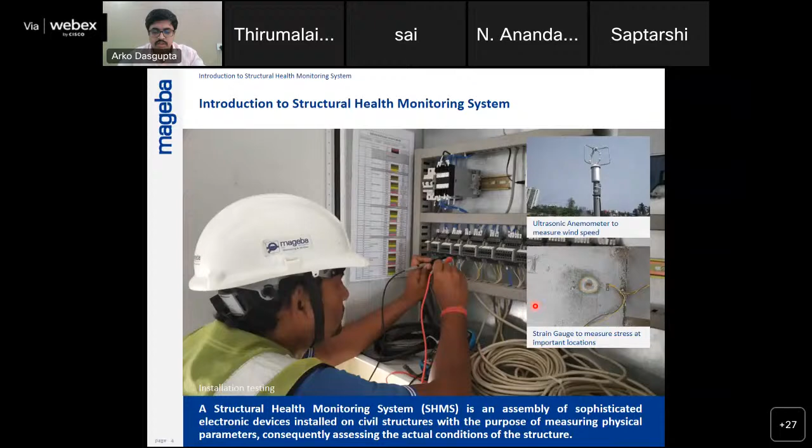What are its benefits over manual monitoring? It has a very high level of efficiency. Loss due to human errors is avoided. We can measure higher details like vibration. The system can work 24/7 without any hindrance. All reports are quickly available over the web. Most importantly, alarm notification: in case an alarm is generated by the system at any time, it is always available over the web without any human intervention.

The different phases where SHM is used: number one is initial construction, inspection and maintenance to investigate a particular concern, and also during renovation purposes.

With this video, you can already see that bridges and all structures are non-static objects that are designed to resist forces, movements, vibration, inclination, temperature, etc. So our goal is to measure all these parameters and see how well their resistance is against such movements.

Some examples where SHM could have prevented failures. It's a very morbid slide, so I won't go into much detail about each case, but the takeaway is that from 1950 to 1999, there have been globally more than 2,200 people dead and more than 1,500 injured. From 2000 to 2019, more than 950 people have lost their lives and more than 850 injured. The numbers in India also are not looking very nice.

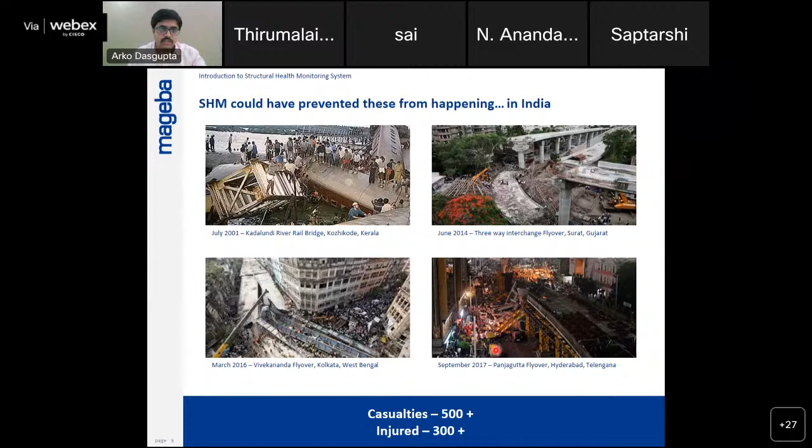Coming to the overview. Sorry, somehow...

The basic overview for any structural health monitoring remains the same. We have the structure, and from the structure we define the scope of what is to be monitored. Depending on the scope, the sensors are defined. Depending on the sensors and their output types, the data acquisition is finalized. Then the software is decided, which takes the data, filters it, and gives you only what is relevant, with output sent to the user for verification.

The typical bridge SHM: we have the structure, sensors installed, and A to D converters, which are required if the sensor is analog, placed as close as possible to the sensors to reduce loss due to extra cabling. All this digital data is transferred to a bridge computer, which wirelessly or via cables transfers it to our server.

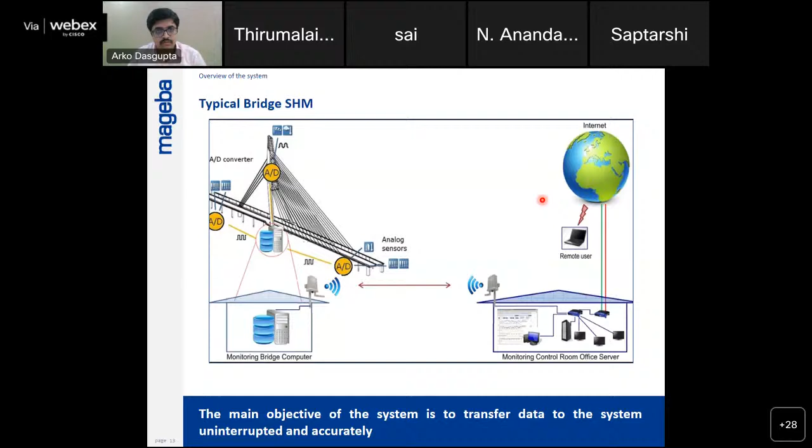Now the question is, what can we measure? We can measure vibration, steel temperature, strain, absolute GPS movement, galvanic corrosion, but these are only a few examples. Due to the development of sensor technologies, any and every parameter as on date can be measured either directly by a single sensor or by a combination of sensors.

The previous slide talked about the structural response, and similarly, we measure the reason for the structural response. We monitor the environmental parameters as well as the traffic movements and loads, so we understand how the structure behaves due to environmental or traffic loads. We have to monitor these also to know the cause of the reaction.

The RoboControl master station, as we call it, should be a lockable box with minimum IP67 protection rating because these are kept out in the weathering elements. Everything should be compactly arranged. The data should be redundantly stored in 2 or 3 different areas. The entire thing should be a PC-based system, so we do not have to bring it back - if something goes wrong, we can take our laptop and solve it on spot. Everything should be of modular design, so if one module is non-functional, the other module should function on its own. It should have a mini power backup in case of power failure.

So we move on to data acquisition analysis. What do we try to analyze? We try to collect data with a frequency of around 10,000 hertz. Then we have modular power supply - since all these sensors work on different power supply, modular power supply needs to be provided on site.

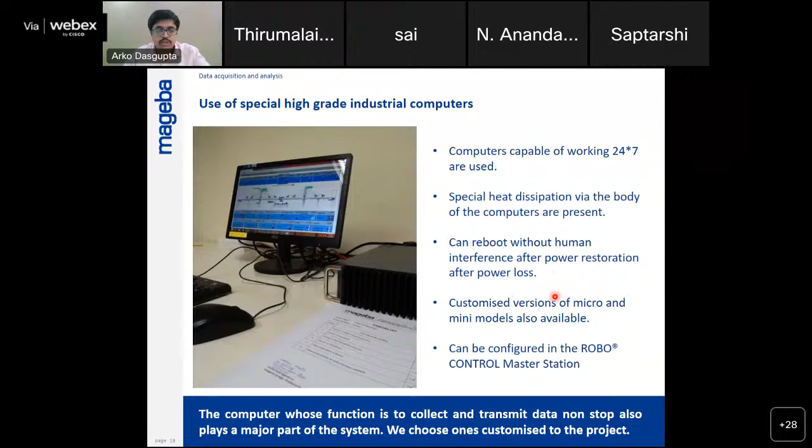At site, we use industrial computers which can reboot without any human interference, after power restoration after a power loss. All these should be available in mini and micro models and are configured inside the RoboControl master station.

Web user interface - all this data should be available on the web. We have a dashboard where you can see the system overview, current and last values, alarm values, minimum maximum values, comparison of different graphs, and individual graphs can also be connected there. We can see historical graphs, say from 2009 to 2014, the entire movement of one particular structure has been recorded, so we understand how the structure is behaving over a longer period of time.

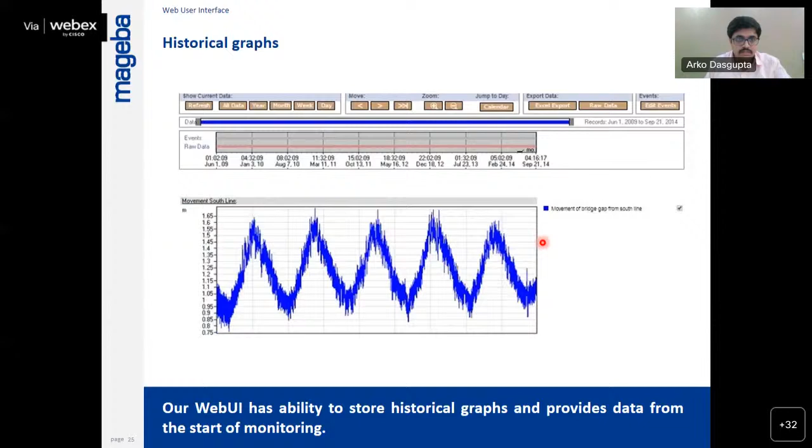Then we'll go to some case studies - some of the projects completed in India. Number one is Signature Bridge at Wazirabad, which is equipped with 104 sensors for permanent monitoring.

As you were speaking about concrete corrosion, galvanic corrosion, we have concrete galvanic corrosion sensors installed inside the piers during concrete casting. We have structural accelerometers over there to monitor the vibration.

Metro Bridge in Mumbai, Maharashtra, is equipped with more than 25 sensors to monitor train movements and the effect of the same on the bridge. It's a three-tier architectural scheme with the metro bridge on top, the Western Express Highway below that, and the road below that, so we have multiple types of sensors over there also.

Hanging bridge in Kota, Rajasthan - it was monitored during the construction phase also, to track the movement of the pylon when the cables were being stretched, and finally a permanent system is installed over there.

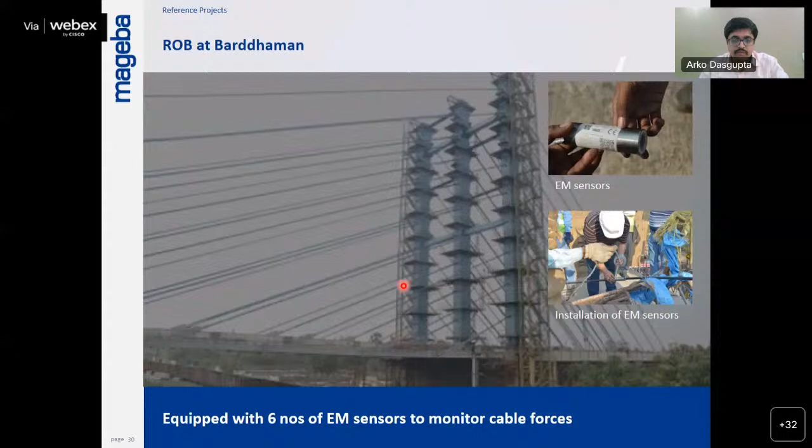ROB at Barddhaman, where we have electromagnetic force sensors installed inside the cables, which are monitoring the force of the cables directly. And we come to the final case study for today, Majerhat Bridge in Kolkata, which is equipped with more than 50 sensors right now to monitor itself.

So let's go to the brief history of Majerhat Bridge. Majerhat Bridge was operational from 1962. In 2018, it collapsed because it was a simply supported span and an intercity railway line was passing below the same. The route which connected Majerhat to part of Kolkata is a very important trade route for certain districts in the area. The old bridge had to be replaced by a completely new bridge, a cable-stayed bridge with a main span of 100 meters and total length of 565 meters, and it's equipped with a complete monitoring system.

Now, positioning of the sensors across the structure: we have stay accelerometers on the cables, accelerometers in the deck, strain gauges at important locations, inclinometers to monitor the inclination of the pylons, displacement sensors to monitor the movement of the expansion joint, a laser sensor at the center to monitor the vertical deflection of the structure, and then the environmental sensors: wind speed and direction, structural temperature, air temperature, and humidity.

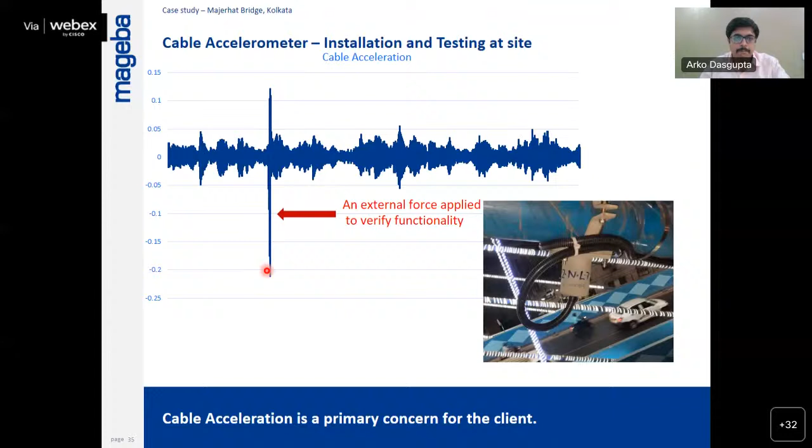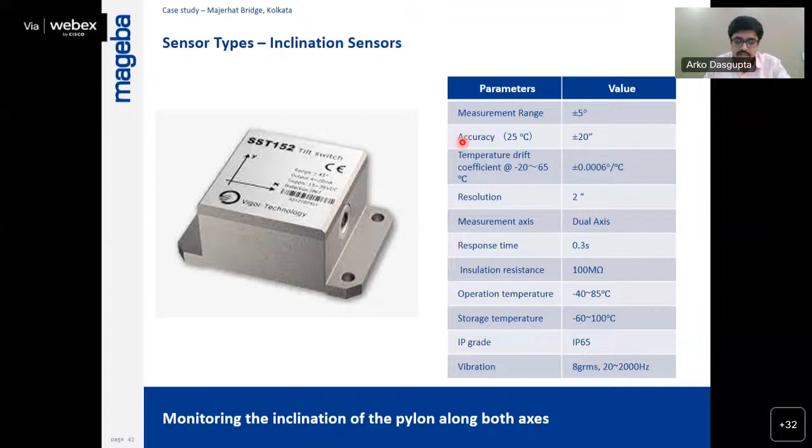Inclination sensors are installed at the pylon to monitor the inclination of the pylons in X and Y directions. Then we have displacement sensors monitoring the movement of the expansion joints. Laser sensors are installed just below the center of the deck, monitoring the vertical deflection of the structure. Ultrasonic anemometer monitoring the wind speed and directions. We have structural temperature sensors monitoring the structure's temperature throughout the time. Air temperature and humidity monitor for correlation purposes.

And also the bearings of the main bridge are being monitored with the draw wire displacement sensor to see how much they are moving over a period of time. Now, some examples of what has been done. The one on the top is structural temperature data from 29th August to 4th September. The one below is the strain gauge data from 29th August to 4th September. We see that both graphs follow each other. So we can say the strain developed on the structure is synonymous to the temperature, and overall the bridge is following environmental load.

Now the question is, the graph for strain, which is very smooth at the top, becomes very rough at the bottom. The bottom has deformations. At first we analyzed the data and took a lot of time to see if there was some problem with our data acquisition system, and then we realized that these minor spikes, or the abruptness in this data, are only generated because heavy loaded trucks are allowed to pass through the bridge only at night. So in conclusion, further analysis is always done by the designer, but from our perspective, this is the effect of environmental load on the structure, and these minor peaks are the effect of live load on the structure.

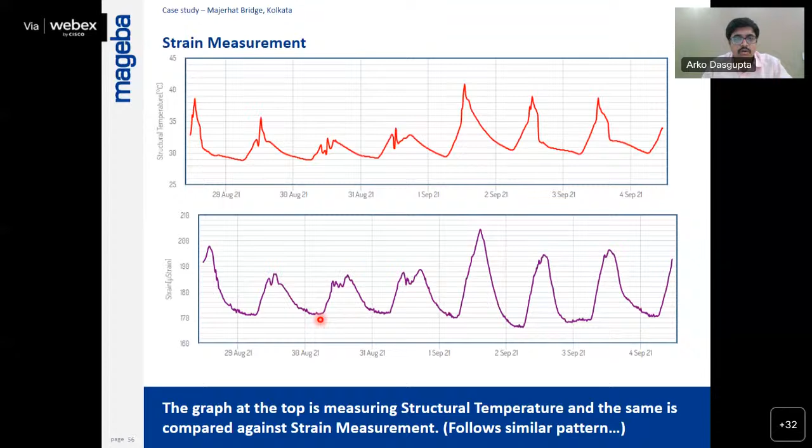So with this type of data, which is generated over a period of time, we can monitor the behavior of the structure with respect to certain environmental conditions or certain excess load conditions over time also. So the objective is to do such analysis. We need to generate the particular time-correct data, which is our main scope.

So coming to the conclusion, why do we need structural health monitoring? It helps you for safety assessment, for damage assessment. It's a quality control approved method. It's an economic method. You can do risk assessment. Alarms can be notified anytime. Design verification can be done as to whether the structure is behaving or not. Customized solutions are always there because every structure is different, and expert advice is always available. Thank you very much.

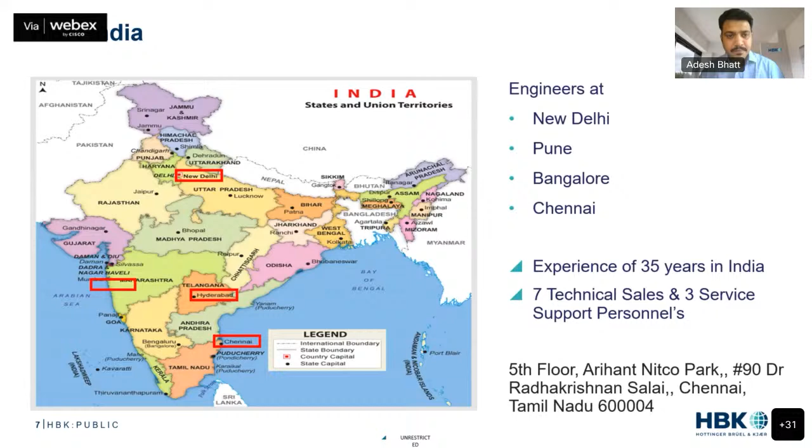So basically, we have solutions across the whole physics portfolio. We have solutions in mechanical for strain, load, torque, force, durability measurement. When I say solutions, that means we are the manufacturer of those solutions. We have solutions for noise, sound quality, sound power, and acoustic measurement. And electrical also, people use our solutions for electric vehicle testing, so there we have solutions for electrical voltage, electrical current, temperature, all those parameters.

Now coming to the point of structural health monitoring. As explained previously by some of the presenters, what is structural health monitoring? It's a process of implementing instrumentation, then analyzing the response of your structure. See, structural health monitoring remains common. Your application could be, just a minute.

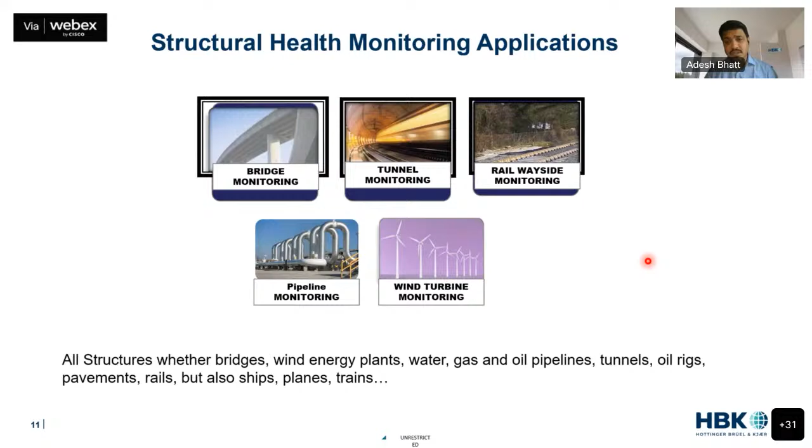Your application could be, your structure can differ. It could be bridge, it could be tunnel, it could be rail wayside, it could be pipeline, it could be wind turbine, or it could be any structure. Structures keep on differing, but the instrumentation for it almost remains the same. Near about, I would say 90-95% of instrumentation remains same, whichever type of structure you talk about.

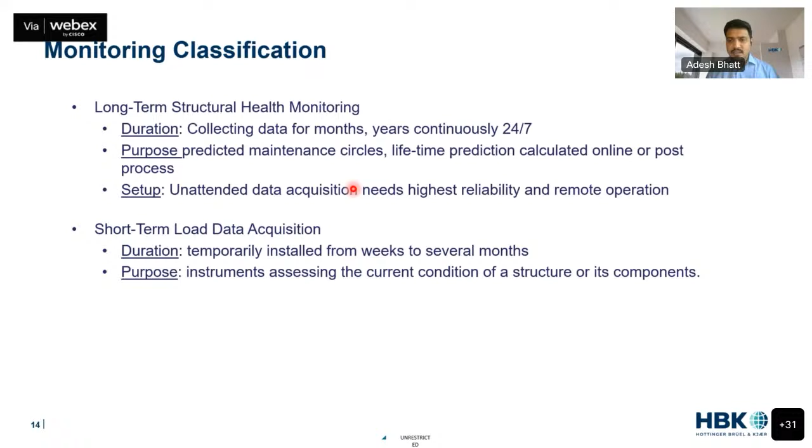There are two types of structural health monitoring, long-term as well as short-term. Long-term is where you mount instrumentation on a structure for a tenure of around 1 year, 2 years, 5 years, 10 years of time. And in short-term monitoring, you have a portable system which you take to different sites. You mount your instrumentation for 1 week or 2 weeks, you capture the data, and you come back and analyze. Our system goes well in both applications.

One more thing, if you're not doing an inspection at regular intervals, then whenever you are doing an inspection, you need a higher level of inspection. You need to go in detail because you don't know what happened in these gaps. So every time you visit, you need a higher level of detailing of inspection. But when you're doing continuous monitoring, because you know what happened in this duration, the level of inspection required, the time of inspection, and the money required for it is lesser.

Now, out of this whole portfolio, except the environmental sensor and server, which are very readily available in India and you can buy in a very cost-effective way, rest everything is manufactured by HBK. So whatever portfolio system integrators or distributors generally have, HBK, being a manufacturer, has it for structural health monitoring. So we stand out to be a single-stop shop for your structural health monitoring needs.

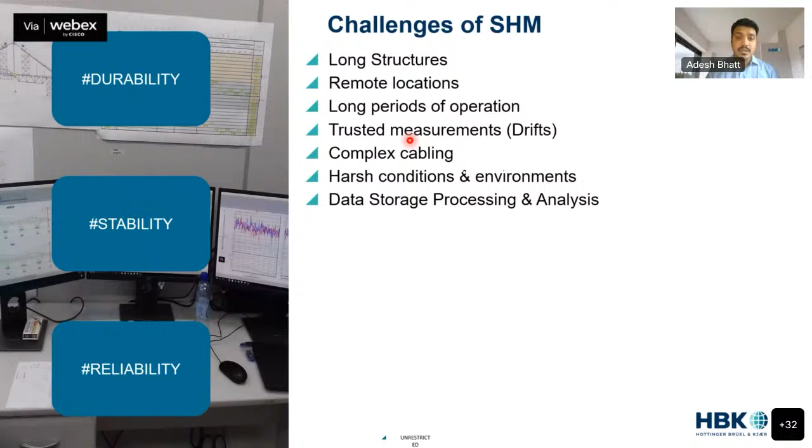Complex cabling. When we talk about bridges, they demand like 70 to 100, 150 sensors. Just imagine 150 sensors, every sensor having 3 to 4 wires. It becomes a very complex cabling. Harsh condition and environment, it is open to wind, air, water, rust, everything. Data storage and processing. So these are the major challenges of structural health monitoring.

And as per us, these are the sensors required for structural health monitoring, which are manufactured by HBK across our factories in Denmark, Germany, Portugal. So load cells, displacement sensor, ICP type vibration sensor, data acquisition system, and strain gauges. We manufacture over 6,000 different types of strain gauges, near about 12 to 15 different types of data acquisition system, and near about 35 different types of load cells.

This is the electrical portfolio. The next one is optical. In optical, we manufacture FBG strain, FBG temperature, FBG accelerometer, FBG tilt sensor, displacement sensor, and optical interrogator, where you can connect optical sensors.

A short slide on how optical sensors work. This is the same optical cable which has been used for years in our telephone and broadband connections at home. We know that same cable comes from tens of kilometers, hundreds of kilometers, so distance is definitely not a challenge. What we do is take the same cable and make a small Bragg grating in it through the laser method. Once this grating is done, this particular phase becomes like a sensor.

This particular small Bragg grating is supposed to reflect a particular wavelength. Every sensor will reflect a particular wavelength. It reflects that particular wavelength and transmits the rest of the wavelengths further. So you can connect two, or 15, 16 different sensors in series. In my system, you can connect 16 different sensors in series with a single cable.

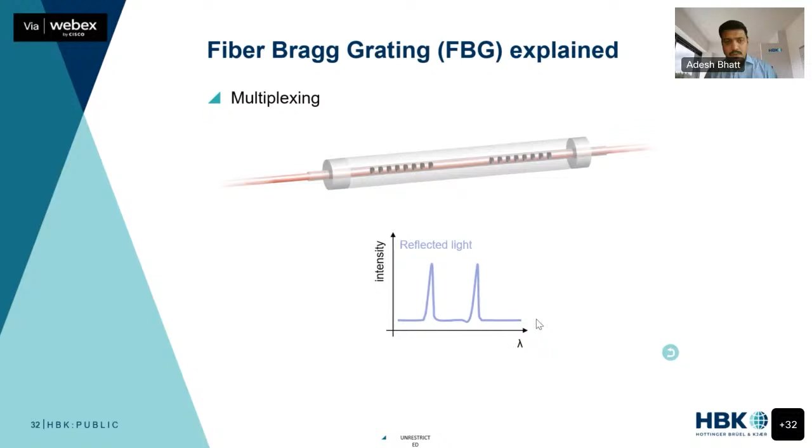What are the advantages of FBG sensors? They have stability. They have an absolute zero reference, because before every triggering, whenever any sweeping happens, a laser is sent which checks whether the measurement channels or sensors are responding to their wavelengths or not. They are insensitive to losses because they work on wavelength, which is unaffected by physical parameters like wind, speed, temperature. Because each works on one particular wavelength, it has its own unique identification. Every sensor has this unique wavelength.

Multiplexing and multifunctioning: you can connect multiple sensors of the same type in series, like multiple temperature or vibration sensors. You can also connect multiple different types of sensors, temperature, tilt, displacement, in series. It has a built-in zero reference. So that's what I said, it doesn't require any calibration because before every laser sweep, one particular wavelength is sent, which checks whether the sensor is responding to that particular wavelength or not.

Nowadays, when we do structural health monitoring, mostly on railway structures, most of our railway structures have a high voltage line above them. It is a fact that near that high voltage line, if you're using any electrical sensor, it will show you attenuated data, because electrical sensors working on DC voltage excitation get attenuated whenever there is a high electromagnetic field near them.

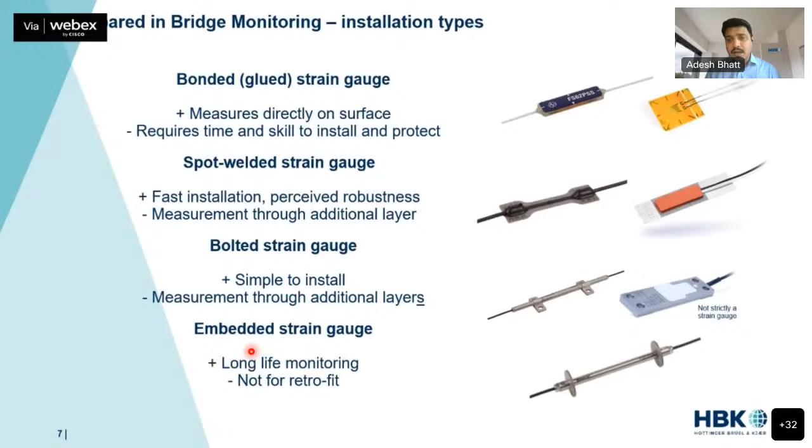We manufacture both types of strain gauges, either embedded, which you can put in while your construction is happening, or we can have surface mounted sensors also. We also manufacture an array of FBG sensors. Like you tell me that you want this much gap between two sensors, then the next sensor this much gap. So we can make those customized solutions also for you. Now, the challenges we talked about, long structures, remote location, long period of operation, these all can be overcome by using a fiber optic solution.

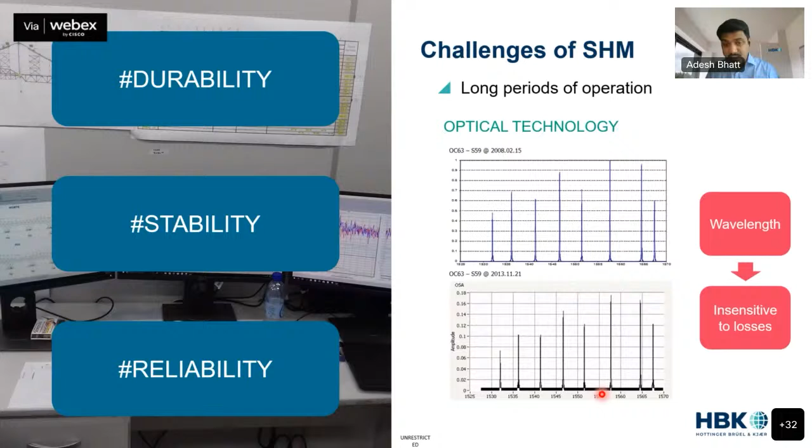Sir, I think you can wrap the presentation maybe in another 2 minutes. Okay, sure. I'll be doing it.

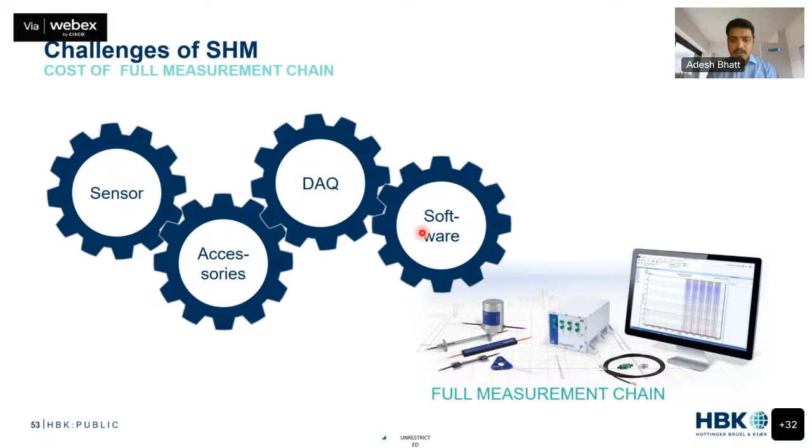And one more thing, in short, I would like to explain hybrid. If I talk about an ideal situation, no application is ever going to be only electrical or only optical. You need a system which should connect optical sensors because that is the demand of the future, and should be able to connect your electrical sensors also because that is what we have had for years. So you should have a data acquisition system which can connect both sensors in parallel. It should not be that someone tells you to connect optical to one data logger, electrical to a different data logger, and start them together.

Because if a situation like an earthquake comes, in milliseconds your whole structure is gone. So clicking two different things is not going to work. So at HBK, because we are the manufacturer of both portfolios, both signals can be logged together in the same data acquisition software that we call Catman, and you can record your parallel data. These are our data acquisition systems. Possibly later we can discuss them.

When we talk about accuracy, we have a 24-bit resolution system. We can log data up to 40,000 samples per second per channel. Every channel can connect all these types of sensors. You don't need a separate data logger for different types of sensors.

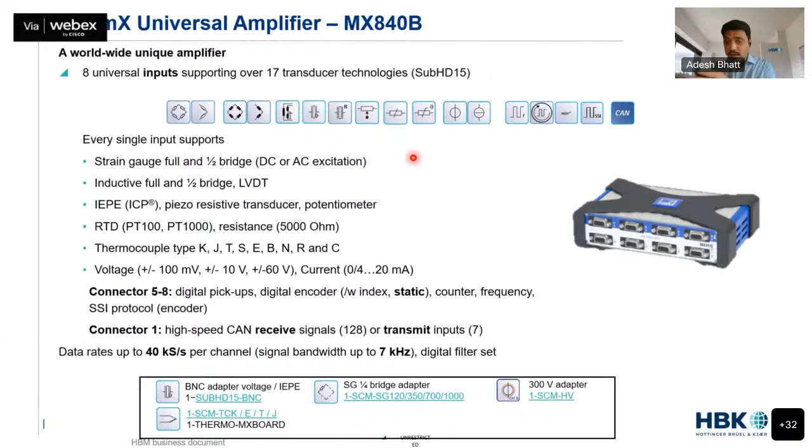I won't be showing the demonstration now. Possibly if someone liked something, we can connect later for the demonstration. That's all from my side. Thank you.

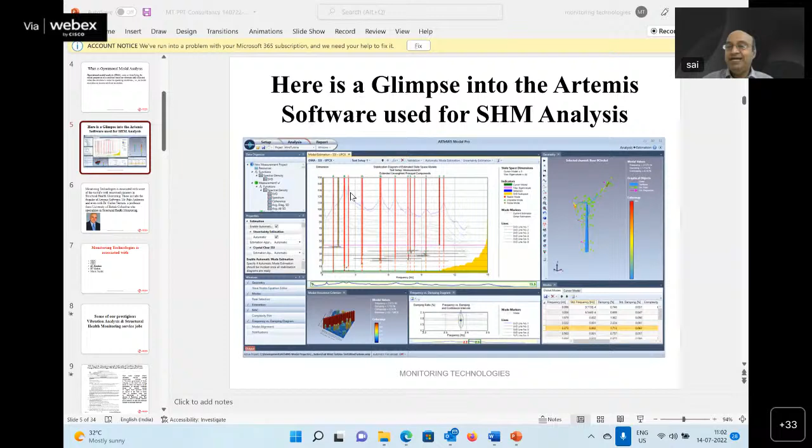So this is the software we are talking about, and it has been widely in use thanks to the heads of departments like Dr. Ramanjanelu, Dr. Saptarshi, who is the active coordinator for this area for this meeting, and Dr. Srinivas Ogu. We are also associated with Dr. A.K. Mathur of IIT Roorkee, and Professor Arun Menon of IIT Chennai, and this is Dr. Carlos Ventura, who is personally associated with us. We have been thinking of bringing him down to India because we did conduct a roadshow in which a lot of officers from various institutions, including SERC, were present, back in February 2020 during my presence at IMAC.

We had certain evenings along with Carlos Ventura and Dr. Palle Andersen, and I requested him, 'Dr. Carlos, you have been going around various places doing structural health monitoring, and I realized you were in China for the Shanghai Tower, the second largest tower in the world.' He mentioned that 5 times in 2019-20 he visited the Shanghai Tower for health monitoring. I requested him to have his presence back in India, and he was kind enough to oblige, but everything went topsy-turvy because of COVID the last 2 years. I was supposed to meet him 15 days ago, but I couldn't. Nevertheless, I'll be meeting him again in the month of February, so hopefully we'll be having him back in India doing some roadshows.

Dr. Carlos Ventura is one of the very regular users of this operational modal analysis software. As I mentioned, some of the other customers who use this - apart from these operational or experimental modal analysis softwares, we are widely associated with vibration analysis of various large machines, I would say, like 210 megawatt turbine analysis, and some of these credentials wherever we are associated.

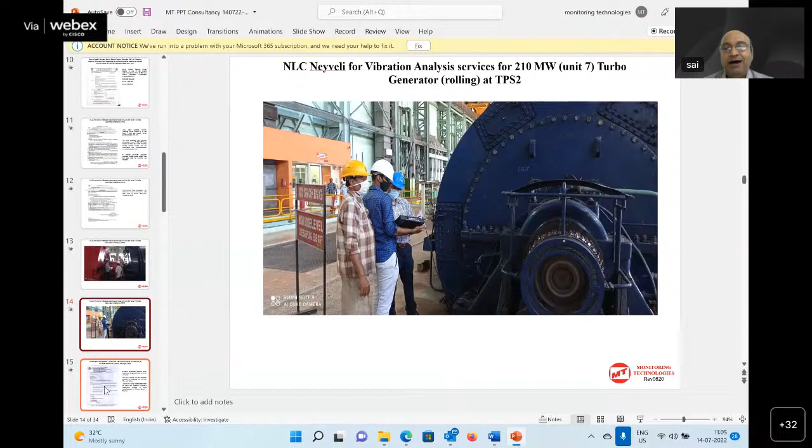This is a 210 megawatt turbine which had very high vibrations, at Neyveli, the Neyveli Lignite Corporation, one of the largest power producers in India. We used all our systems, data acquisition systems and sensors, to take care of the measurements of the entire huge machine. It was resulting in large vibration in the floor, so we carried out diagnostic remedies, including some small balancing, the dynamic balancing of the generator, because turbine balancing is a complicated job, and the generator has the facility to add counter weights. A provision has been given in the generator, and we carried out those jobs at this place.

These are some of the credentials I'd like to quickly share with you. Idukki Hydropower Station, which is one of the largest hydropower stations in India, under Lake Tekadi, which is in the Periyar Sanctuary, an elephant wild sanctuary in Idukki, which is a picnic spot for most people. But not many know that just below Lake Tekadi, vertically something like 800 meters down, there's a tunnel under which there are 6 turbines producing 200 megawatts each, something like 1000 to 1200 megawatts total, which had vibrations of the floor to a level of something like 99 microns or 120 microns.

I'm associated way back - this is one of my oldest cases, way back in 2003. We were able to reduce the vibrations of the turbine by carrying out vibration analysis.

I do have some pictures, but unfortunately I'm not in a situation at this point to share all of that. Perhaps those who are interested will have a second meeting for about an hour. If time and opportunity permit, I would like to get Dr. Palle Andersen as well as Carlos Ventura online for those very much interested in this specialized area of operational modal analysis or experimental modal analysis and structural health monitoring.

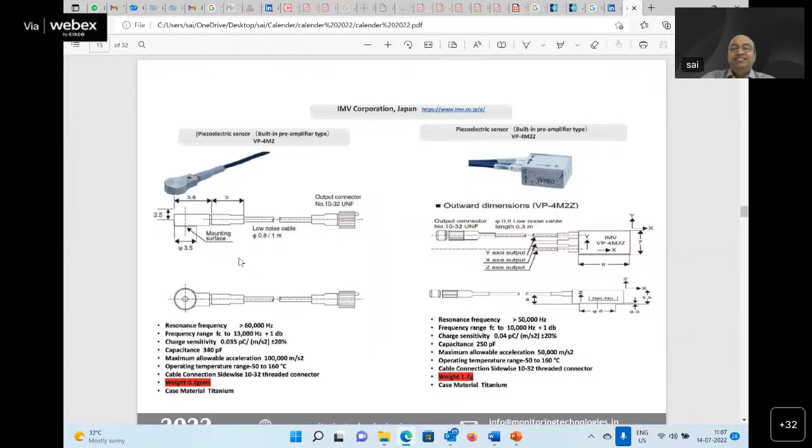I'd like to quickly take you across the various sensors we are dealing with. This is one of the sensors we deal with - IMV Japan, a very specialized sensor of very tiny nature, triaxial sensors. We are a one-stop shop for a complete package of sensors, data acquisition systems, training systems, and portable systems to measure data, acquisition systems, recorders, and very high specialized sensors, packaging them as a total package to supply.

We're also associated with the Vibration Institute and the Mobius Institute, who are pioneers in vibration concepts. There are certain courses like Category 1, Category 2, Category 3, Category 4 in the specialized vibration certification programs which we are associated with.

These are some of the consultancy jobs which we have carried out. As I mentioned, we are associated with most of the Indian industries. DRDO is one of the companies we regularly deal with, BARC. Indian Navy uses our systems, some of the frigates. I'm actually very proud to be associated with some cases I wouldn't like to even talk about - it's prohibited to talk outside - but we are very closely associated with BARC, Indian Navy, DRDO group of companies, supplying systems to various advanced protection systems for India, contributing quite a lot of systems and supporting software.

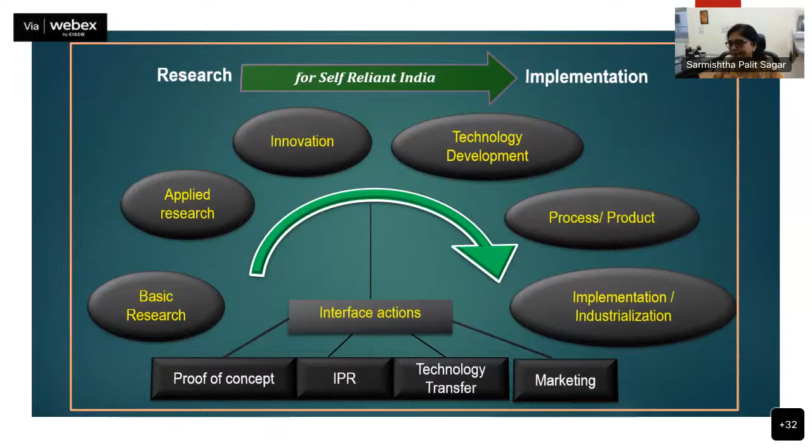One of the major problems of this billet caster is the breakout. What is breakout? Breakout is when the liquid steel spills from inside the billet and breaks out of the skin. It causes sticking of this liquid steel, that is, it solidifies inside the equipment. So not only the loss of production, it also causes time cleaning the equipment, a lot of time, and sometimes equipment failure. So it's really a major problem.

Generally this problem exists in continuous casters. But for the slab caster, where plate-type material comes out, the mold is a plate mold with thickness nearly 40 to 50 mm. It is very easy in that case because the design is so generous, it allows you to place thermocouples in the channels. Also, the water flows through slots behind the plates. So every slab caster mold comes as an instrumented mold, and the breakout prediction logic already exists.

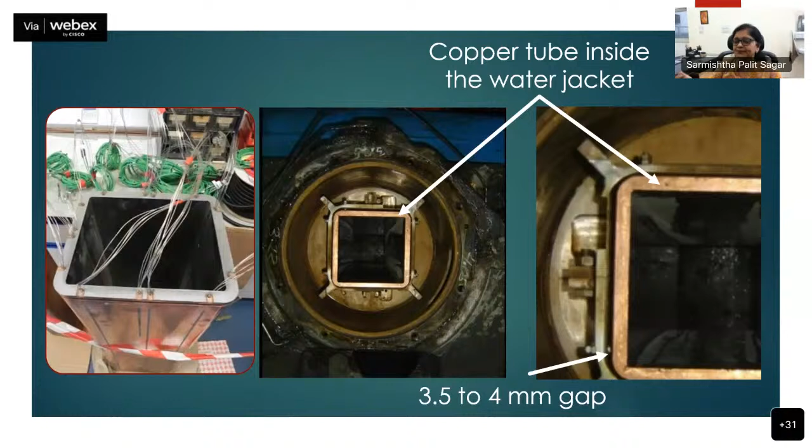But unfortunately, thermocouples are not a viable solution for the billet mold. You can see the picture on my left side. If we consider thermocouples, even for an R&D study, so many cables may come out, like a patient with lots of tubes on his body. And you can see how the copper mold looks inside the mold assembly. There is a water jacket surrounding it.

And the gap is only 3.5 to 4 millimeter. So you have to protect from the leaking of water, because there is 1800-degree liquid steel passing. That means if any liquid comes, if there is any puncture, it will be like sitting on a bomb. So all these problems have not allowed having an instrumented billet mold, where you can target this problem of breakout.

Now the question is, if it is so important, why has it not been done yet? Yes, for the slab mold, why is it so important? Because the loss is quite huge. It is nearly 10 hours of stoppage of production, whereas in case of billet mold, it is 4 hours of stoppage of production. So people have gone with a theoretical model. They have not come to the practical one, as there were lots of issues.

We came up, along with CGCRI Kolkata, with a solution using fiber Bragg gratings. As Adesh has already talked about the advantages of FBGs, I'm not coming into that. I only want to say the one advantage I'm taking: the number of sensors you can write in a single fiber, and that can be placed. And because its dimension is very narrow, 120 micron, without damaging the surface of the mold, you can make only a 1 or 2 millimeter groove and do a proper engineering design to embed the fiber on the cold wall of one face of the mold, or on 4 faces.

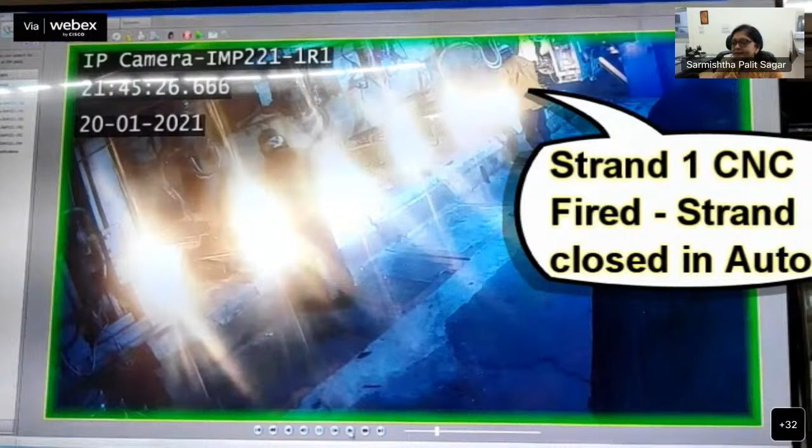So this is the work on breakout detection using fiber Bragg grating sensors, for an area which is difficult to access. And actually this is the first time in the world that a breakout was detected in a billet caster in advance and corrective measures were taken. This was from the customer desk, where he has written that it holds tremendous potential to save cost and improve the productivity of a billet casting plant.

Coming to our other 2 sensor works, because NML is one of the NDE centers in India. The other center is in IIT Chennai, and our NDE activities are quite elaborate. From NDE, we have come to structural health monitoring, and we developed a lot of methodologies for progressive damage assessment before the material fails, along with quality assessment of the product. As my topic mentions, it is for process and product improvement. The first was on process improvement. Breakout can be detected much before, and you can take proper action to prevent it, so the process can be monitored.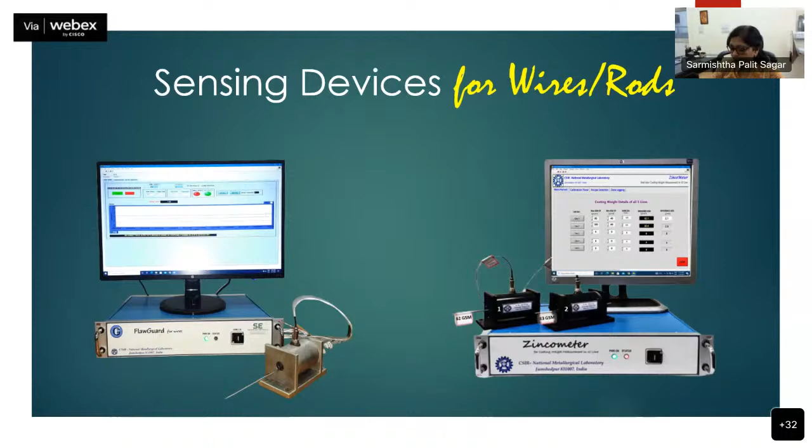Coming to the second part of my lecture, which is basically on product quality assessment. One device we will talk about, we named it Flaw Guard. That means it is guarding against flaws in the product. And another is the zincometer, which is used for zinc coating weight measurement on thin wire during its processing. All are real time. In wire drawing industries, this wire is drawn at very high speed, nearly 8 to 12 meters per second.

And when this wire is being used for very high-end applications, that is, if it is used for tire bead wire, which is used in vehicle tires, that is in trucks and buses, and if there is any failure, suppose, because spotting very small defects like transverse crack, sliver, fins, which normally happen in wire, detecting at that speed by the naked eye is impossible. It is not at all. That means you need some real-time prediction system.

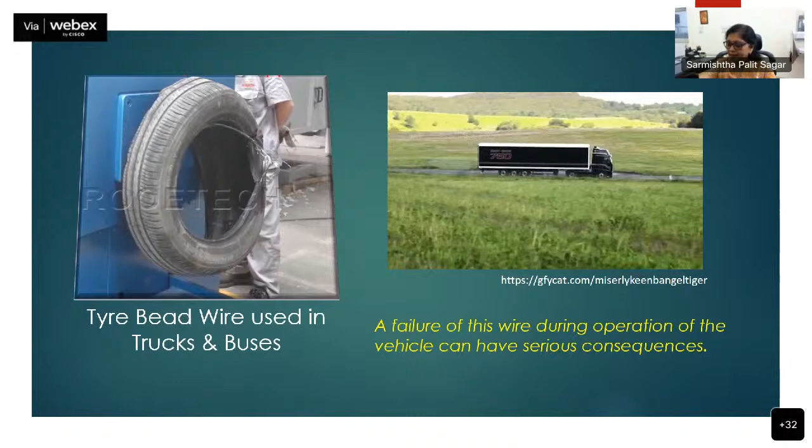Some systems are available globally, which are for thick wire, and the speed is much lower, 4 to 5 meters per second. But for these high-end application wires, wire manufacturers were lacking a real-time defect detection system. So we came up with a system, as I told, it's a flaw guard, which is a low-cost solution, because there is a large number of wire drawing machines, and the imported system is very, very high cost. So putting it into all the wire drawing lines was becoming really difficult for any manufacturer.

So we came up with this low-cost solution, and this is completely designed, fabricated, and the transfer of technology is all done at NML, from the sensor and the device part. You can see the sensor which can be placed in the line of wire drawing, and it can detect the defect in real time at a speed of 8 to 12 meters per second. The other features: the wire diameter can be from 1.5 millimeter to 13 millimeter. Only based on that, in this encircling coil, the dia has to be changed. The defect depth resolution is 100 micron even for 2 to 3 millimeter wire.

And another advantage is the defect characterization. It can count the defects, it can find the location of the defect, severity. So based on severity, you can separate your spools for the applications. Some unique features. Definitely it is made in India, but what is most important here is the real-time data saving in ASCII. So normally when we find that some of the spools are giving lots of defects, you can go back to this data and do process parameter optimization, which is not available even in the imported system. We have incorporated Internet of Things so that severity can be alerted through SMS and email, and definitely it is affordable, very cost effective.

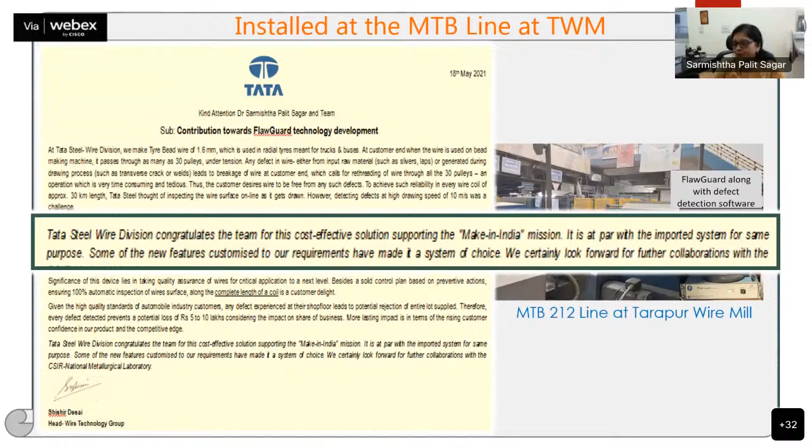We have already installed recently, in February 2022, one device in one of the lines of Tarapur wire mill, which, as you all know, is globally the most renowned wire mill, and in India it is the biggest wire mill of Tata Steel, and it was found at par with the imported system. This technology has already been transferred to an MSME company in India, based in Bombay, that is Sani Electronics, and presently it is being marketed by them.

Coming to the second problem, here it is showing the galvanizing process in a wire mill. So there are two types of galvanizing process in the galvanizing line. One is called nitrogen gas wiping and another is pad wiping. Nitrogen gas wiping is basically used when the coating thickness is quite high, that is above 150 GSM. And in pad wiping, there are two pads and the wire is passing in between the pads, and these pads are tightened by a screw. And this is where the coating thickness is below 150 GSM. It is basically from 60 to 90 GSM.

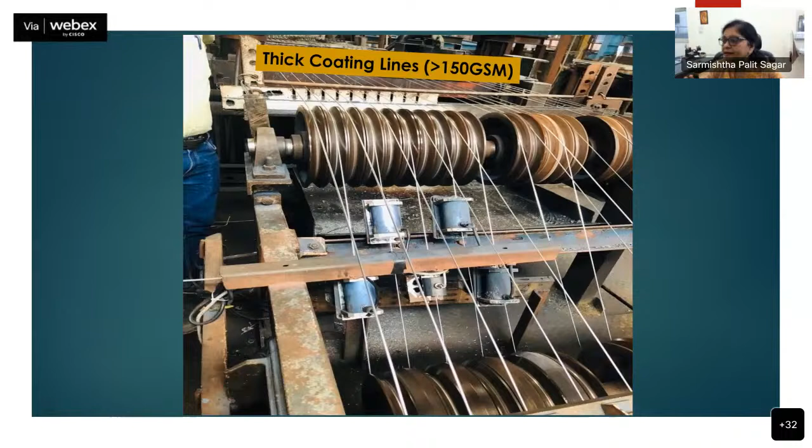And generally, these pad wiping lines are the maximum in any of the wire industries. In one example, Tarapur, there are 30 pad wiping lines, whereas only 10 are nitrogen gas wiping lines. The nitrogen gas wiping line generally comes with a sensor for real-time coating weight measurement along with the system provided by the original equipment manufacturer. But the commercial pad wiping lines are thin coating lines, and the speed is also much higher. No such system exists for them. So we came up with a device called zincometer along with an encircling coil based sensor. The principle is based on eddy current.

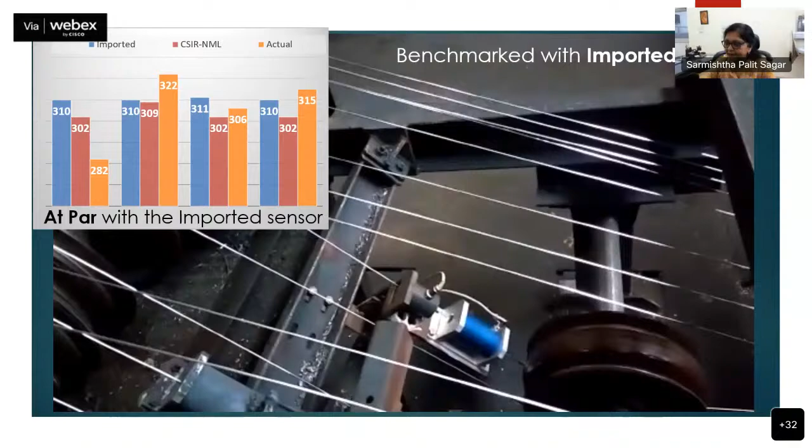And these sensors were benchmarked with the imported sensor in the thick coating line. Because, as we all know, we don't believe our own Indian systems. So we always go for an imported system because we think we can't produce something at par. And the same thing happened at the industry stage, and it was benchmarked and found at par with the imported sensor. And then the performance was evaluated in the thin coating line, and we placed two sensors in the two lines.

You can see here the two sensors in real time, and the performance was evaluated against the lab value. What they normally do is cut a small piece at each shift, dip it in the solution and find the weight loss. Till now, this is the way of measuring the coating weight in any thin

coating line. One system along with two sensors we have already installed and commissioned in February, and it is satisfactorily working and operational at the plant. We are continuously getting feedback, and we are now in the process of making it a multi-strand system which can be used commercially, because it is only for two lines. So for all the 30 lines we can install it.

We can install. Madam, yeah, madam, sorry, only two slides.

I can finish. Our current work is on sensors for high temperature sustainability. As all of you know, high temperature for NDT sensors for damage assessment is a loophole. Most sensors sustain up to 400 degrees centigrade, so real-time damage assessment was a pain. With a low temperature co-fired ceramic approach, we have developed a 32 layer eddy current sensor which has survived even up to 800 degrees centigrade. We could check only up to 800 because our facilities were not there beyond that, but 800 is more than enough

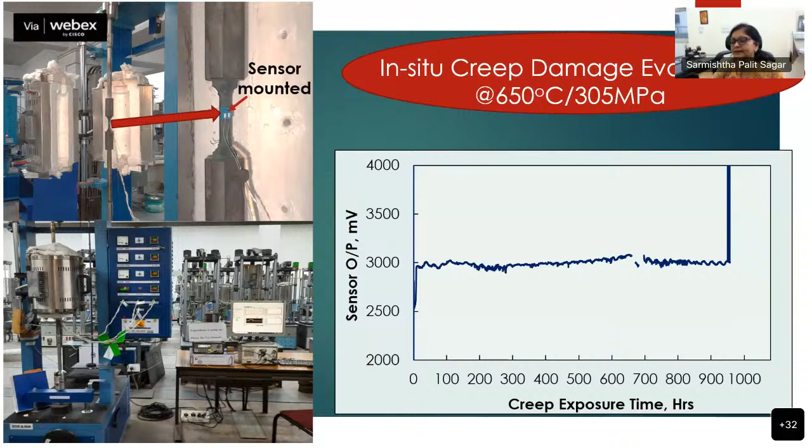for our work purposes. We have also used it for in situ creep damage evaluation at 650 degrees centigrade. The sensor was mounted on the sample, placed in the furnace, and the data was continuously monitored. You will see there was one small hinge. Okay, I think it has already come.

I would also like to acknowledge Dr. Shomnath Palash of CGCRI, my own NML scientists and my students, along with Tata Steel for their continuous support in providing the facility at their end to test its applicability, which is normally a hinge for all R&D scientists, because mostly we develop in the lab, but getting into the plant has always been a big difficulty. So thank you all once again.

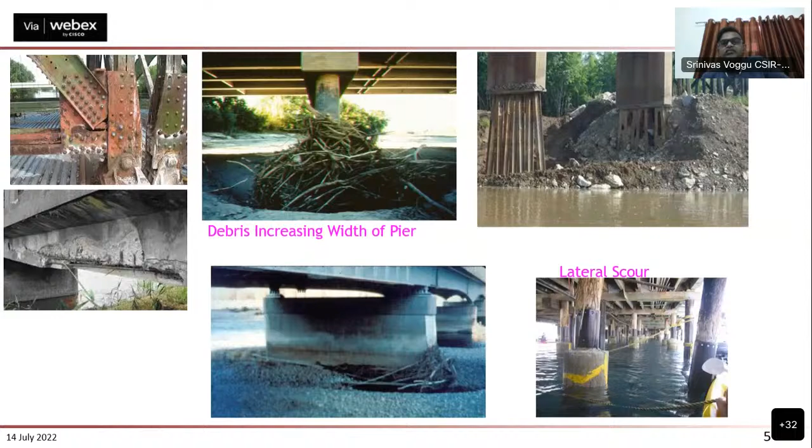Of course, in India, SHM aspects are coming forward in a big way in recent years. From the superstructure to the substructure, there are a lot of needs to be attended to ensure integrity and safety. One important thing is monitoring vibration, because no structure is static; every structure is dynamic in nature. Once we monitor the dynamic aspects of the structure, we can really see how the structure is going to perform in its real conditions, in future loading conditions and other scenarios.

This is one of the recent failures that happened even in Florida because of the lack of monitoring in the structure. Suddenly it collapsed before they started going for retrofitting. So, if you see the performance history of the structure, in every aspect of the structure, before reaching the service life, the structure is going to deteriorate.

So when SHM intervenes at every stage, if we can do proper SHM and come out with proper remedial measures, we can ensure the safety of the structure and bring it to its original design state. And we can even ensure that the structure can be extended beyond its service life.

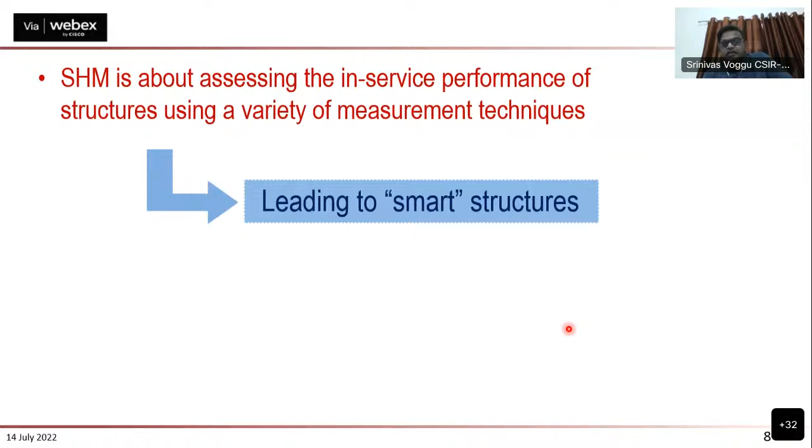So basically, somebody is talking about the smart structure, and we can make the structure smart by imparting all kinds of sensors and the SHM system incorporated within the structure itself, if it is a new construction, during the stage of construction or during the service stage of the structure, so that the structure can respond to all its conditions. Whenever something happens, it can react, and it can give warnings and triggers so that proper maintenance strategies can be looked upon.

So I will not go deep into what SHM is, because these aspects have already been talked about by other speakers. So just to say, there are different classifications of SHM systems, because depending on how sophisticated the system is, the level of the structural health monitoring aspects will also keep on increasing. So we can come upon proper quantification and prognostics of the structure when we go up in the sophistication of the SHM system.

So now SHM has come to a stage where we can have different kinds of categories, like data-based systems and physics-based modeling systems, and then integrating both aspects, we can bring up a digital system environment where a digital twin kind of system can be brought about by integrating the SHM system along with the computational modeling and simulation aspects, so that we can come over the physics-based modeling. That can be used for checking the integrity of the structure.

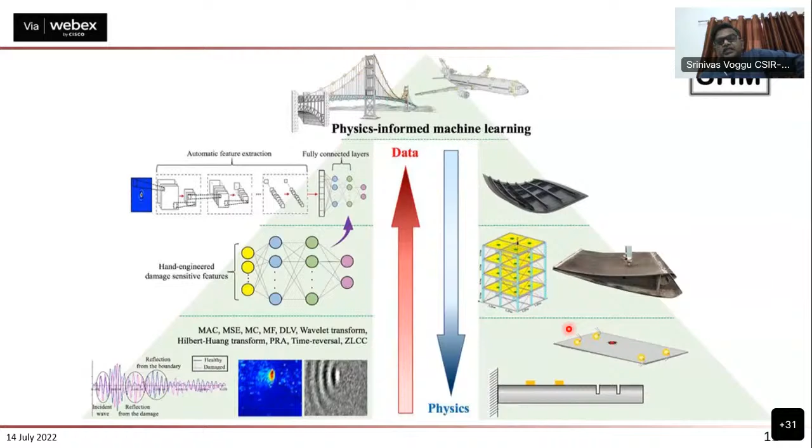Basically, there are different SHM categories. When we go for the SHM system, one is static field testing, and another is dynamic field testing. Either can be periodic or continuous monitoring. Basically, in static field testing, what we do is behavioral, proof load testing kind of thing. And in dynamic field testing, we basically depend upon the vibration and the dynamic characteristics of the structure, and those characteristics can be considered for coming out with the performance characteristics of the structure.

So what dynamic testing gives is mainly to determine the maximum amplitude levels of vibration occurring in the system, to ensure the comfortability of some of the structures also. So instead of just looking at structural safety aspects, one is the comfort zone of the structure also, particularly in bridges and building structures, the comfort levels are to be looked upon, so that the peak levels of vibration can be seen, and then coming up with different dynamic characteristics like frequency, mode shape,

and damping ratios, and these can be used to come up with algorithms that can be used to check the degree of performance of the structure. And also to determine the damage characterization and the damage mechanisms that occurred in the structure at different periods of time. Then that can be used for updating the finite element models or the simulated models, so that the computational models can be used in the digital models of the structure.

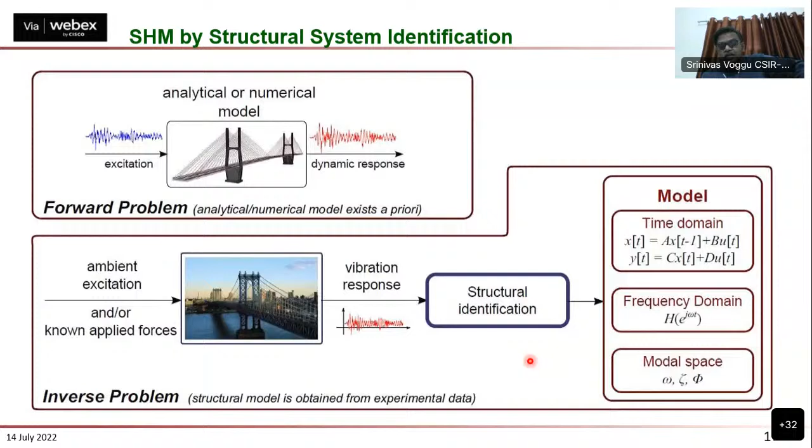Basically, what we obtain from the structure are vibration signatures, and these vibration signatures in the form of time domain data are converted into frequency domain data, from which we obtain modal characteristics such as frequencies, mode shapes, damping ratios, etc.

For the last 20 years at SERC, we have been working on these aspects, particularly to develop domain expertise on vibration testing and vibration behavior of structures, and how it can be used to ensure the safety and integrity of the structure.

We established a complete full-fledged dynamic testing facility using modal shakers, like electrodynamic shakers, and all kinds of impact hammer systems. We developed techniques for measuring data from the structure, and implemented these on real-time structures such as bridges and other structures as well.

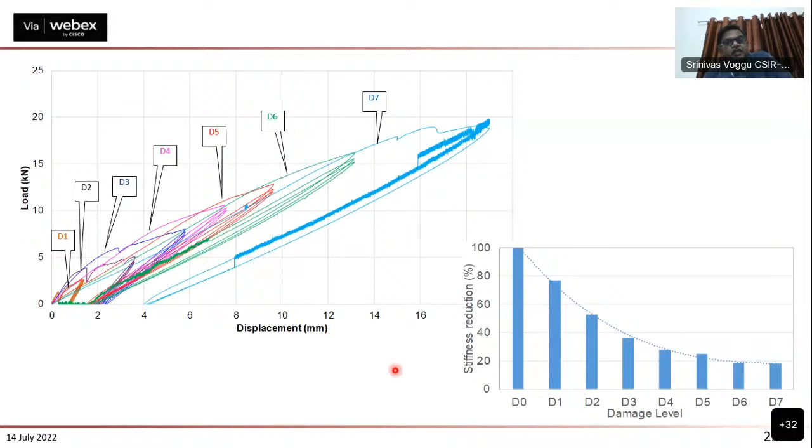We used modal shakers and developed benchmark models in the structural laboratory using scaled-down models, with different kinds of structures and different deterioration mechanisms, to study how these affect structural performance and cause structural integrity loss. Structural stiffness loss and structural integrity loss give differences in the dynamic aspects of the structure, particularly in terms of the linear and non-linear vibration behavior of the structure.

We studied how to extract those features, what different methodologies exist for extracting features, and how to implement those features for identifying damage states in structures. These methodologies have been developed at SERC, and we have successfully implemented them on various types of structures.

We are very much associated with Indian Railways, and continuously investigate a lot of structures for them. Over the last 20-25 years, many railway bridge tests have been conducted, and various dynamic response parameters have been assessed and evaluated. These give information on how the dynamic interaction, when a train is moving on the structure, affects the structural integrity and performance.

Fortunately, right now I am at a bridge site in Patna. We are testing the JP Setu Bridge, the second longest bridge after Bogibeel Bridge in Assam. This is a 4.5 kilometer long bridge, with each span being 125 meters. Immediately after 5 years, it is showing some deterioration mechanisms in the structure, particularly at the bearing levels and at the structural joint levels.

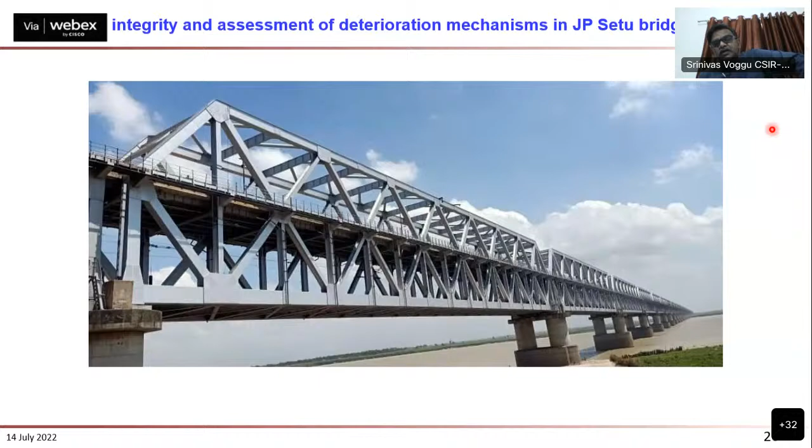So we have been called, and we are right now doing the instrumentation testing of this structure, particularly on some typical spans on this structure. So that work is going on.

At the laboratory, we developed some simulated structures and tested them with different types of sensor orientation and sensor mechanisms, to see how the dynamic characteristics are affecting structure integrity, and how to develop simulated numerical models and update them using the experimental dynamic characteristics.

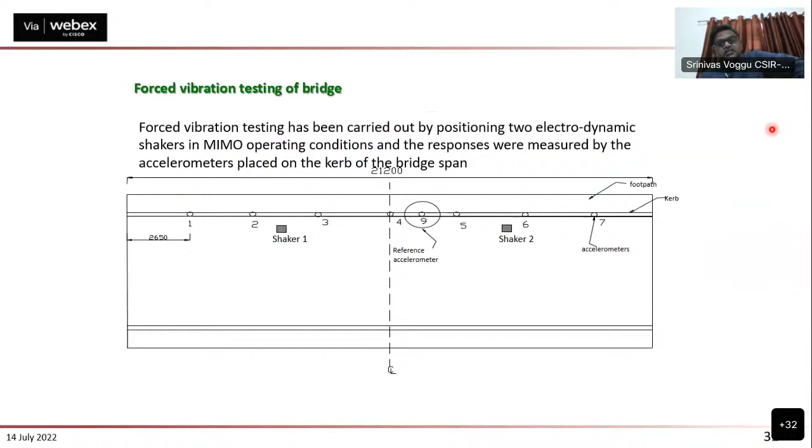We also did several tests on highway bridges to check on higher vibration levels and what is causing them. We applied dynamic shakers to the bridge structure and assessed the dynamic characteristics using different kinds of sensors located around the structure. Under forced vibration conditions and ambient vibration conditions, the frequency and dynamic characteristics were evaluated and checked along with the numerical models, coming to a conclusion on the cause of vibration and providing a solution to the client.

Not only bridges—we also did several tests on turbo generator foundations, particularly a heavy 600 megawatt turbo generator foundation. The problem is localized vibration levels; at the global level it's easy to understand how it occurs because we know how the structure affects global vibration levels, but at localized zones, what is the cause of that vibration?

For that, since they don't want to stop the turbo generator, under the running service condition we developed a kind of sensor mechanism, particularly based on prior simulated numerical models.

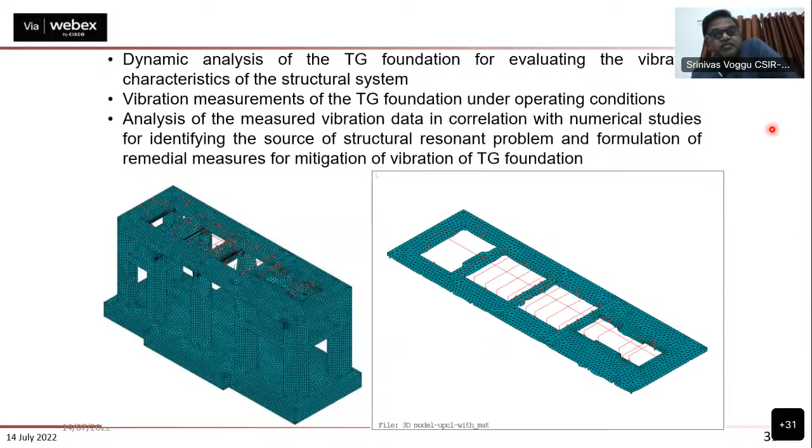We developed this sensor placement mechanism and evaluated the dynamic characteristics at a few key locations on the structure, and also globally evaluated the structural dynamic characteristics along and across the structure using operational modal analysis tools, to assess how the localized vibration levels are occurring, how they affect the structure, and how to mitigate that vibration. That level of study was done and a solution was provided.

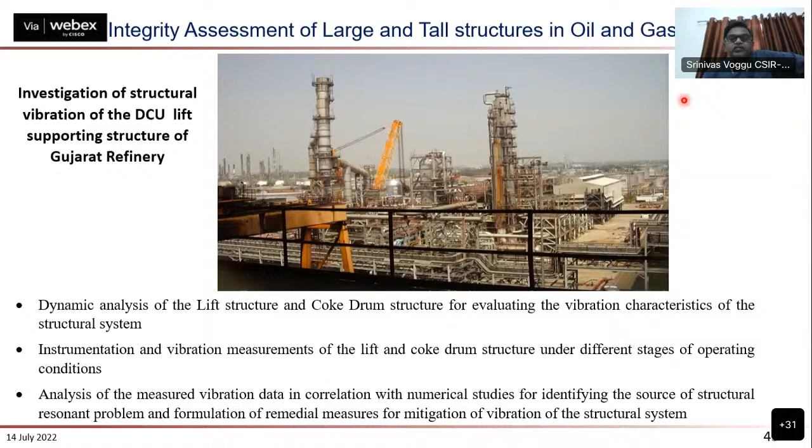Another kind of testing is on oil refineries, where many structures are associated. One particular very typical case occurred on a very tall structure, about 70 meters, a coke drum lift structure, which was getting the highest vibration levels and the lift kept stopping in between.

Complete vibration level studies were undertaken and investigated at all levels. A lot of prior studies had been done and different strategies to mitigate the vibration levels had been tried, but still the problem had not been solved.

Yeah, I'll be stopping in another minute or two, maybe.

So here we did all kinds of vibration studies along with numerical simulation solutions, determining how the structural resonance is happening at that particular location when the coke drum structure is under operating condition. We provided the solution and gave retrofitting recommendations to the structure.

So these are some of the case studies I wanted to look at.

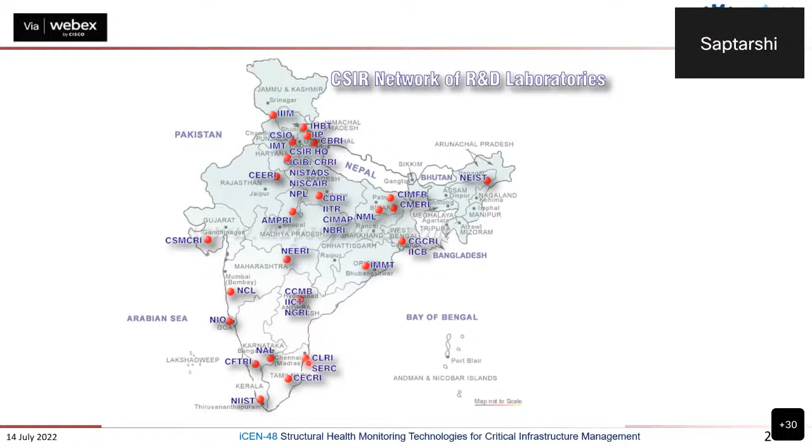In SERC, which is under the Ministry of Science and Technology, we have 10 infrastructure laboratories including advanced materials, material testing, fatigue, special multifunctional, theoretical and computation, wind engineering, steel structures, and structural monitoring laboratories. Hello?

Hello? So basically there are two groups intensively working on this: the structural health monitoring laboratory and the special and multifunctional structures laboratory, and we are well equipped for it.

I think Dr. Srinivas has already given a glimpse of the vibration-based techniques. There are various techniques and methods implemented for different scales of structures, different types of structures, and structures made of different materials. So I will just give the basic glimpse of the things.

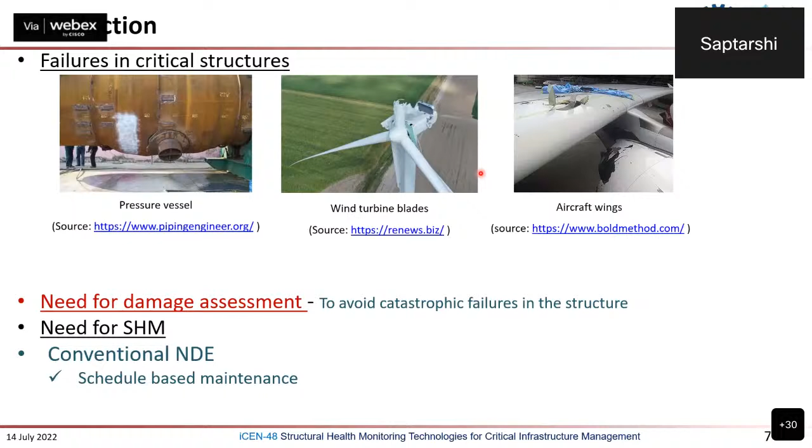The very peculiar part is that we have chosen three articulated structures where we do a lot of design, modeling, even predictive modeling—everything—and even then it fails, showing that whatever we are doing may not be sufficient. We have to go further. So I was telling this morning that we have to go from this conventional NDE to built-in sensors and actuators, which are required for as-needed NDE.

But as the level and demand increases, our cost and sophistication also increases, so we have to be very careful about what our demand actually is. At SERC, we are working on the vibration-based technique and the wave propagation based technique, which involves high frequency wave propagation.

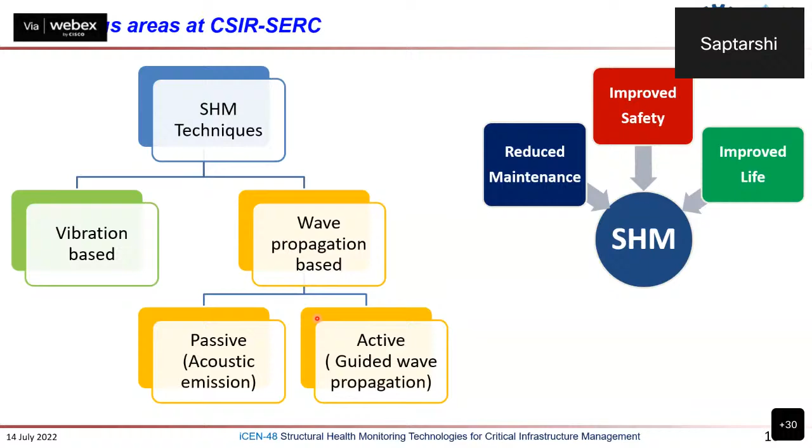Dr. Srinivas has already talked about the vibration-based technique, and here we are talking about the passive and the active techniques. Why passive and active, I will come to a little later. As I was saying before starting the presentation, we are trying to do three things. One is that the early age damage detection has to be done.

And more challenging is to develop something which is baseline free, because most structures, at least civil and mechanical structures, don't have any baseline information. So if I have a method which depends on damaged minus undamaged and looks at the changes, it may not work.

So these challenges have been addressed, and whatever techniques, technologies and methodologies are developed here at SERC and more broadly at CBRI, CGCRI, NML, CFTRI and those places, we are going to implement, as Palit Madam was also telling, how it has revolutionized the entire monitoring system. First I will just give a glimpse of things, no technical jargon here.

Basically, I want to talk about the nonlinear ultrasonic technique for early age detection in bridges, because if we talk about bridges, they are very, very large scale structures. And the challenges come either from the concrete material or from steel-concrete composite interface problems.

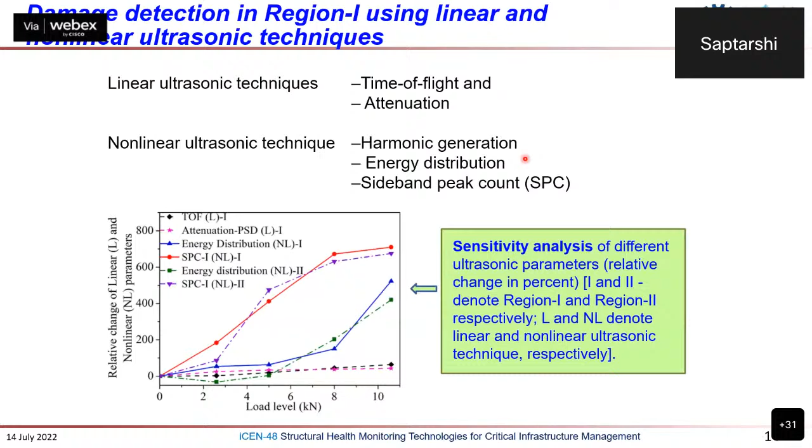But the message to the forum is that it is possible if you take advantage of advancements in ultrasonic techniques for early age detection of damage. Now, what I have described is basically a bulk wave technique, which will not be effective for very thin wall structures, right?

So the thin-walled structures, when I am giving a wave, because of the boundary, it will be interacting with that boundary. It will be guided by that boundary. Then what will it have? It will have good things. What are the positives and the negatives?

The pros and cons are that if you use the guided wave or Lamb wave based technique, it can travel at a very high speed, and you can develop a method that will be effective for kilometers-long structures like pipelines. It can be done for surface and internal defects, whereas with the bulk wave you can't do it for the surface.

But the problem is that it is technically very complex, and it has a dispersive nature. So this has to be sorted out. At SERC we have developed some technique, but as I was saying, the challenge was to develop it baseline-free.

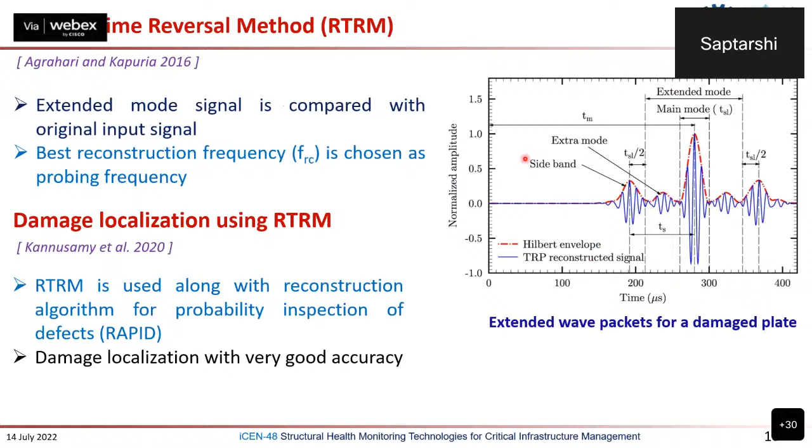So if I don't know about the as-constructed structure, even then if I use the Lamb wave and transfer that wave, you will see here you are able not only to detect damage, you are even able to localize the damage. And I am re-emphasizing it again, without the need for any baseline data. You don't need the baseline, but you are able to localize. So you have done the damage detection and localization without baseline data.

Now the question comes: if I do it for one damage case, can you do it for multi-damage cases? Yes, let us go further. Then we have much improved the technique. It is called a virtual time reversal method. Just for your information, if you want much more information, you can contact us later.

So that is using broadband measurement, and it has been shown how this works for double damage cases. Actually, this is the first time this has been developed. It is by Professor Kapuria, the former director and professor of IIT Delhi, and Mr. Kannusamy, who is doing the work on that. They have made this.

And now we have shifted this: the Lamb wave is doing very good work, but can we do non-contact SHM by using the laser Doppler vibrometer? Because it will solve many problems the live structures are facing with pasting strain gauges or mounting sensors on top. And we have shown that. I think I will be able to show the images.

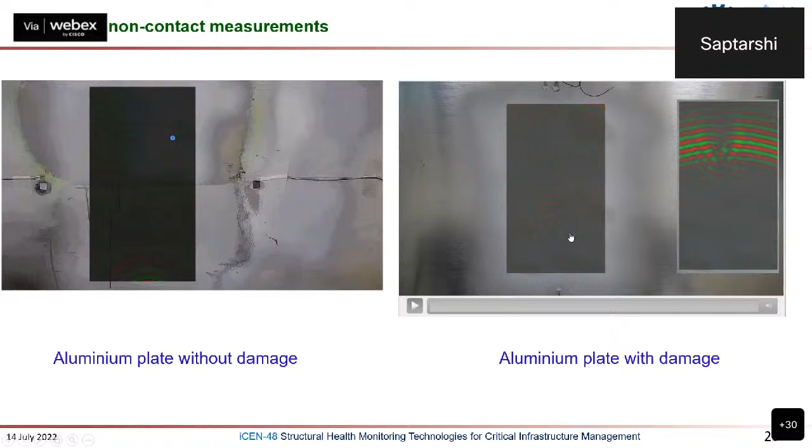See here, if I have put the laser vibrometer with no damage, you see how the wave is going. And if I give the input frequency and there is damage, you see how it shows the damage, and it can also localize it with non-contact sensing. This facility we have at SERC is, I think, the only facility available in India for 3D, with very high frequency, so that even very minute damage can be

detected and localized. Now these are active techniques, but you cannot always do active signaling. So we are also working intensively on acoustic emission. Acoustic emission works passively. Whenever a crack or micro crack generates, that wave travels to the surface, and by using sensors we are able to pick up the event that is happening.

And these are being used intensively for very large structures like storage tanks, even pipeline structures, even pre-stressing tendons. So these are being used. And here we have shown that we are able to localize leakage in the pipeline system by using acoustic emission.

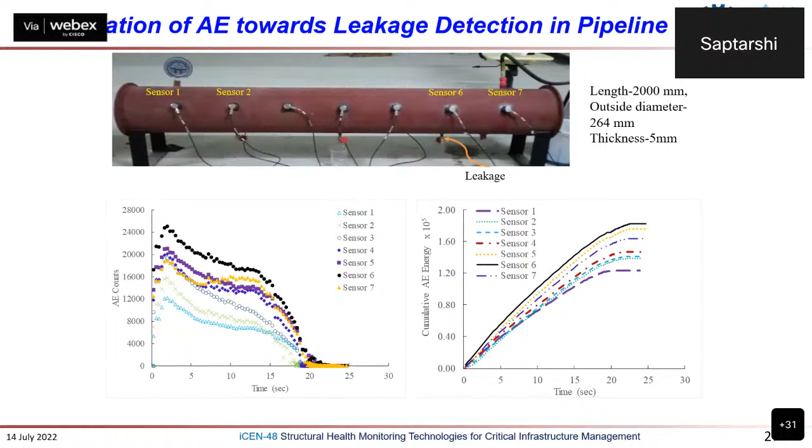And it is a perennial problem for the old municipality areas and all. I think in the UK, in some area of London, this acoustic emission system has been implemented to detect the leakage in the underground pipeline. And also you have seen how acoustic emission can be used to identify the

damage in the structures. But the unique work done at SERC by Dr. Banjara is that when we do the retrofit in the structure, we do the retrofit and just come back. You do not know what has happened and whether it is correct or not, or whether it has changed the desirable mode of the retrofitted structure.

And it was shown that yes, by acoustic emission features, if you can extract them in a proper way, you will be able to understand that the shear critical beam has been successfully made into flexure critical, or something like that. I don't think with the other techniques it will be so easy to identify the accuracy, the efficacy, and the appropriateness of this type of retrofit scheme.

And also, Dr. Thirumalaiselvi has developed some technique by using AI and ML. Acoustic emission gives you a lot of features, and from the feature extraction, if we can segregate by using some AI technique, you can say how much damage is happening, or what type of damage is happening in the structures. So these are being implemented in the field.

If anybody is interested further in the details of the techniques and technologies developed here at SERC, please do come here and we can discuss. We have also done an interesting implementation of combined AE and DIC, where AE is the passive technique and DIC is the active technique. AE takes the information from inside, DIC takes the information from the surface, and DIC is a non-contact method while AE is a contact method.

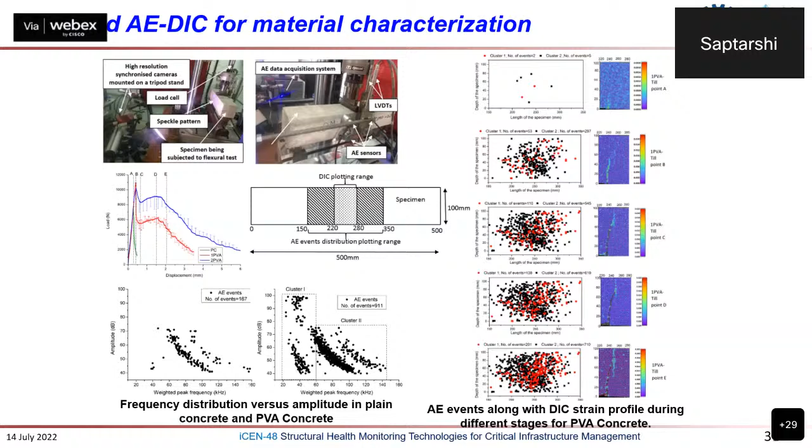So in all three ways they are complementary, and it has been shown how the two techniques can be correctly used to say how much crack has happened, where the crack tip is, and how you can predict further cracks. Generally in a concrete type of structure, you may not be able to really detect how the cracks are happening. Okay.

Now, a very interesting thing we have developed is the nanocomposite sensor, developed at SERC. We may not be able to give the details because we are going to take a patent on it. This nanocomposite sensor is a cement-based sensor, so you have no problem embedding it in the structure.

If you embed it in the structure, it is able to sense the strain and also the vibration, meaning the natural frequencies of the system. That will go a long way, because the environmental variabilities and long-term problems will not be there, and you can simply embed it in the structure. Even in aggressive environments it will work.

Now I will finish my presentation on a very good note: in the Atmanirbhar Bharat initiative, we have started work on the establishment of a center for innovation and manufacturing ecosystem for sensors. This is the first time this type of initiative has happened in India, where 5 CSIR labs, CGCRI, NML, SERC, CBRI, and CIMFR, along with various industries and government bodies, have come together to establish a center for sensor development and implementation for mining, structures, and process control.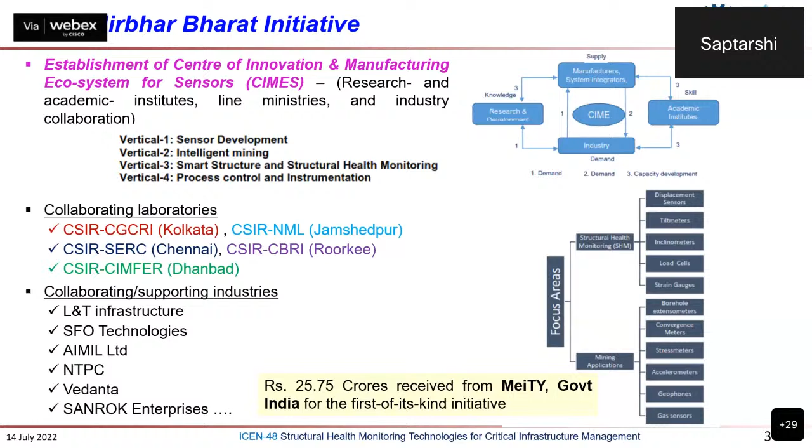Now that we have taken the whole thing, we can develop the sensors in India, and we will implement, check, verify, calibrate, and we can go into the market. So if you see on the right side, there are many different sensors that are being planned, and it is showing an ideal synergy between the research laboratory and the industry coming together to meet the requirements the line ministries are looking for.

So with that, I will just end the presentation by saying that this is a forum where a lot of industries are there, and the research institutes and academic institutes are also there. I think that we have to move forward towards developing the output-only methods, distributed fiber optic sensing for long structures, and vision-based sensing; those things have to be developed. And finally, the use of IoT for civil structures. I think it has to go a long way.

So the way forward is that at SERC, and overall as CSIR, we are so open and looking forward to having complementary abilities from the industries so that we can develop globally competitive and futuristic technologies which can really help India to grow further.

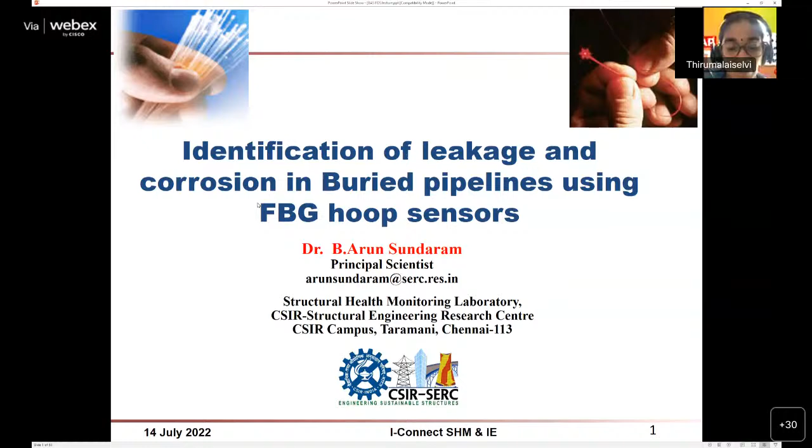Thank you, sir, for your excellent and informative presentation. Now we have come to the last presentation by Dr. Arun Sundaram, sir. Let us see whether he could. Yes, yes. Sir, your slides are visible, but the voice is not coming. Now it is audible? Yes. Okay, so there was some problem in the settings. No problem, no problem. Please go ahead. Yeah.

Good afternoon, everyone. This presentation will be on the application of FBG sensors. Already we have had two presentations on FBG sensors for different applications. One was from HBK, where they explained the application for SHM, and one more from NML, where Madam explained applying FBG sensors for monitoring in metallurgy applications.

So this is the basic principle of a fiber optic sensor, which works on the principle of total internal reflection inside an optical fiber. Those reflections will be converted into different parameters like strain and temperature. We take the useful information from the reflected wavelength of the light. So we have a classification of different types of sensors based on different principles, like the basic transduction mechanism and the sensing.

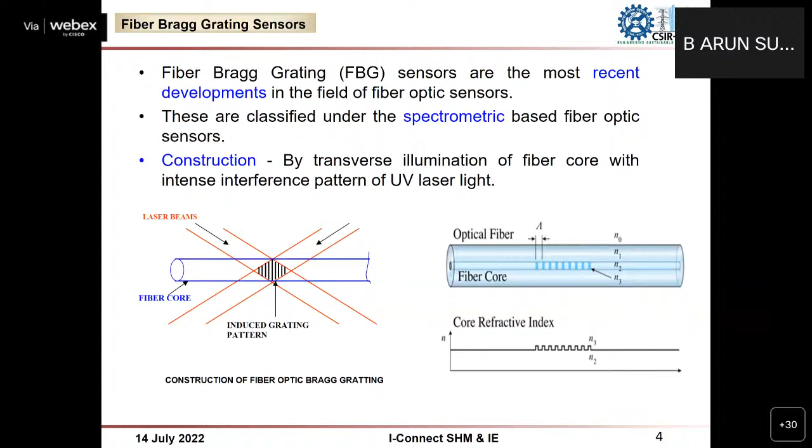So these are the advantages of using fiber optic sensors, like the flexibility and small size of the sensor, and also corrosion resistance, because these are made of silica, normal glass, and also immunity from EMI. We are mainly using these sensors for health monitoring of railways. On railway bridges, there will be a problem of EMI interference, so in those scenarios we can avoid such EMI interference by using these optical fibers.

And another major advantage, as presented earlier, is multiplexing. Multiplexing is another useful one, where we can connect many sensors to a single optical fiber. So that is one more advantage of using these FBG sensors in SHM applications.

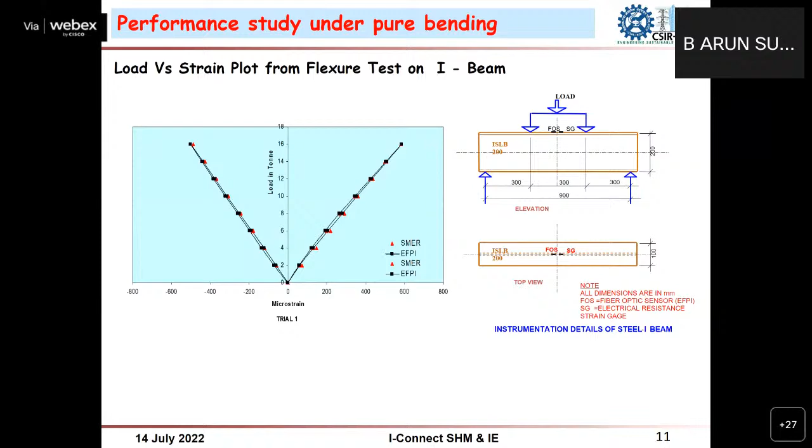So this is a comparison between the other conventional gauges and fiber optic sensor, where we can see it is very much at par with the well-established conventional sensors. Since this was new to us some time back, we carried out some systematic studies by putting in different specimens, like tension test and even compression test. And we have compared the responses between these FBG sensors and the normal well-established conventional electrical sensors. We found very good compatibility between the two sensors.

Previously we used a commercial sensor. Later we associated with our sister lab CGCRI, where we collaborated with them and we manufactured our own FBG grating facility. Through that, we manufactured our own sensors using their facility. Those sensors also need to be performance evaluated.

So we tried different packaging, because civil structures need sensors to be deployed during the construction time. For putting inside concrete, we made some packaged FBG sensors. We tried different packaging techniques, where we designed the package and got the help of CGCRI for manufacturing these packaged sensors. And we carried out some performance evaluation studies by conducting tests at SERC. We found that our packaging and the sensors are working well.

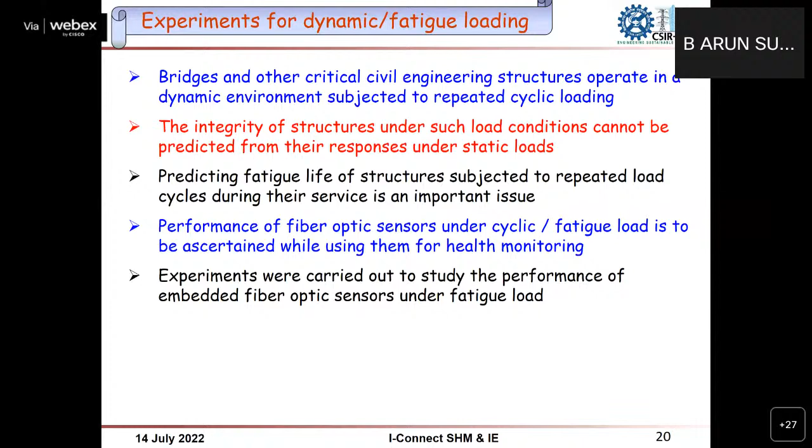These studies are part of developing our own indigenous sensors, because we have a large scope of applying these FBG sensors for SHM application. Then we carried out static tests and also dynamic and fatigue tests, because railway bridges and other bridges are subject to dynamic and fatigue loading. We carried out two types of tests, low stress high cycle and high stress low cycle. In both scenarios, the FBG sensors and strain gauges were working very well. With the indigenous sensors we are making, we were getting confidence from these preliminary studies.

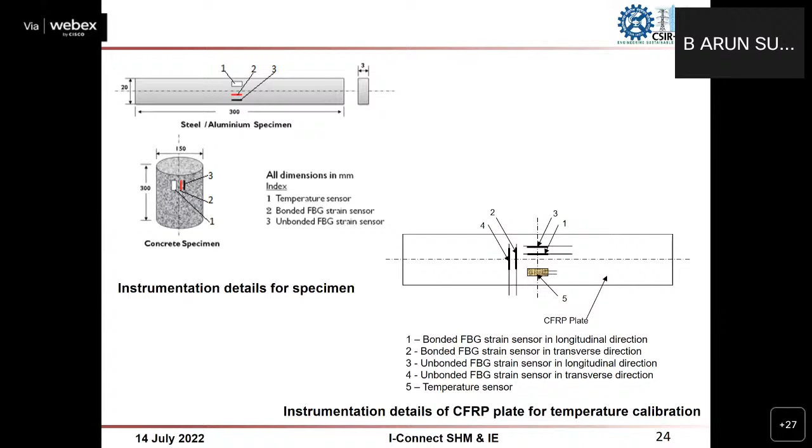Then, thinking of applying these SHM techniques for long-term applications, this is for temperature calibration. We carried out some studies. These FBG sensors are affected by strain and temperature, so when using these sensors, we have to put a separate sensor for monitoring the variation of wavelength due to temperature. So we carried out temperature calibration, so that we can put one sensor and neglect the strains or stress due to temperature. These studies we have carried out for normal civil engineering structures.

Coming to long-term application, we tried two sets of experiments where we put these FBG sensors embedded inside a post-tensioned concrete beam, left it for a period of 1 year, and monitored continuously. We can see the response measured from the FBG sensors; they have very good stable responses from the specimen. Here you can see the comparison between a normal vibrating wire gauge and FBG gauge. Both are coming very well, so these are suitable for long-term application when put inside the concrete.

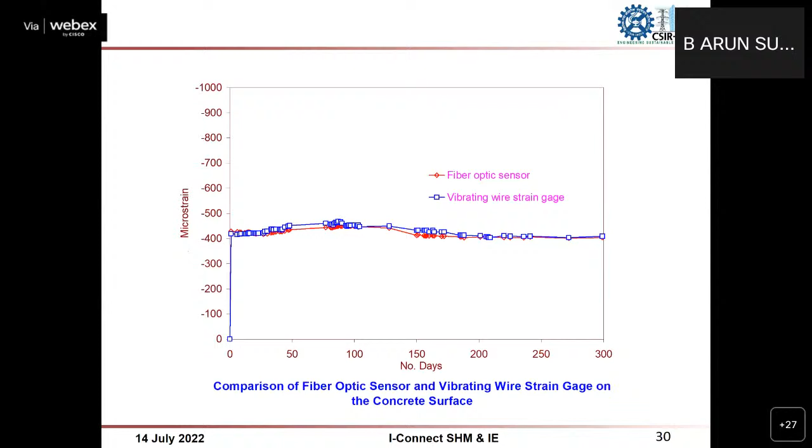And this is for the normal self-straining frame, where we put these FBG sensors on a pre-stressed strand. We stressed the strand and kept it monitored for 1 year. Here also we can see there is a stable performance of these FBG sensors.

Then we tried to apply these bare indigenous FBG sensors for monitoring repaired concrete structures. The main advantage of these sensors is that they are very small in size, so we thought of putting them between the concrete and the FRP strengthening medium, at the interface. During our testing, the main failure of FRP strengthening is debonding, so we thought of monitoring this debonding at the moment it initiates. With these instrumented sensors, we were able to detect the debonding of FRP from the concrete.

And then recently in a CSIR mission mode project, we collaborated with CGCRI, and we thought of developing a hoop strain package sensor mainly for buried pipeline monitoring, because we have many cross-country pipelines carrying fuels, where the leakage problem is of great concern, and identifying the leakage is important.

The main challenge is how fast we can identify the leakage. Presently, what they're doing is checking the pressure drop at the pumping station receiving end. If there is a pressure difference, they conclude there is a leak. But how do we detect where the leakage has happened?

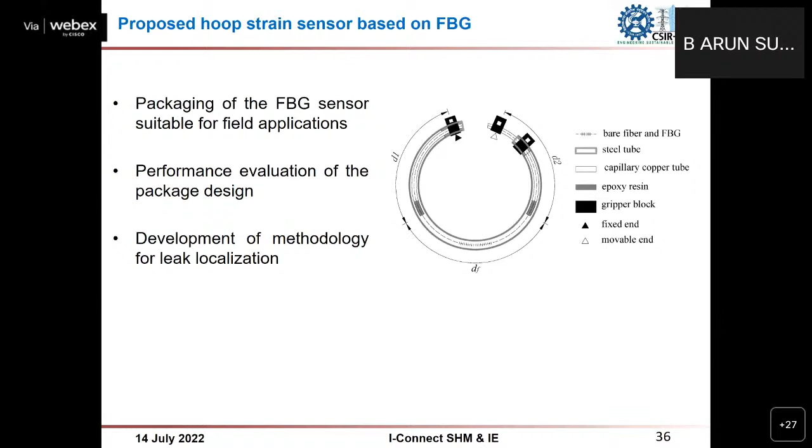So that's what we thought - we will develop a hoop strain based sensor, because of the pressure inside the pipeline there will be some hoop stress developed. We thought of measuring that, formulated a design, and along with CGCRI manufactured these sensors. We put them along a pipeline network and measure the hoop strain - wherever there is leakage, there will be a change or drop in the hoop strain, and from that drop we can identify the location of leakages.

So we worked with CGCRI and developed this kind of package sensor - around 4 to 5 FBG sensors - and put them in a pipeline. We pressurized the pipeline in our laboratory and saw that the anchoring mechanism, the package, and the stress transfer from the pipeline surface to the FBG sensor were all working well.

The main challenge was that these sensors are developed using mechanical interlocking, because on fuel-carrying pipelines we cannot do any welding. So we designed a mechanical locking mechanism to fix these sensors at our required locations. We saw stable pressure measurement with no much variation in the response.

Then we carried out some prototype studies - we erected a pipe test bed here and fixed our own developed indigenous sensors on it, along with strain gauges. We pressurized this system and artificially simulated leakage by releasing some valves in the pipeline, so that whenever there is leakage through the valve, there will be a drop in the hoop strain.

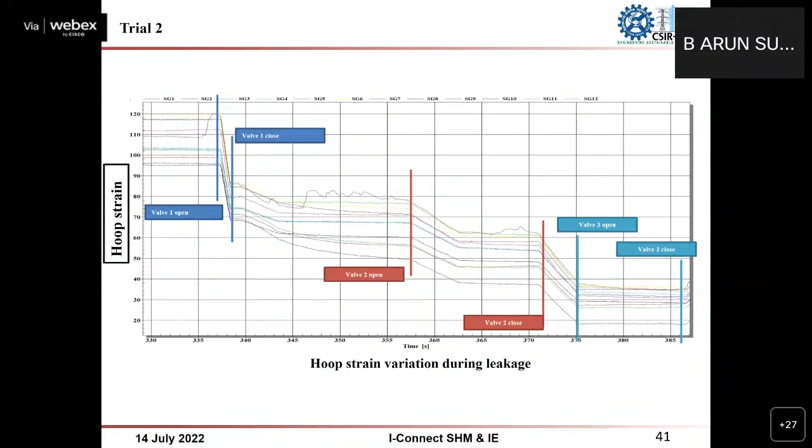During our testing, we noticed that whenever we opened some valves, there was a sudden drop in the hoop strain because of the pressure being reduced due to leakage. We were able to pick up these pressure drops during the leakages, and then we worked on some theories - whenever there is a leak point, there will be some time lag before that pressure drop is detected.

So we have two sensors, and with respect to the time taken by this pressure drop, we developed our own algorithm so that we can locate the distance from the sensor at which the leakage occurred. We are working on applying this FBG-based approach for detecting leakages in buried pipelines.

Very recently we started working on distributed fiber optic sensors. These FBGs are discrete or point sensors, which we connect through multiplexing to a single cable, but even though they are discrete sensors, we only get responses wherever the grating FBG is located. With the distributed scattering principle though, we are able to get the strain or temperature response over the entire length of the optical fiber - that is the advantage of distributed fiber optic sensors.

So the entire optical fiber, wherever it's laid - maybe 10 meters or even 1 kilometer - we get the strain or temperature along the length of the optical fiber with respect to location. That is the major advantage of this distributed sensor. Presently we have obtained one such distributed sensing system and have slowly started applying it for our SHM applications.

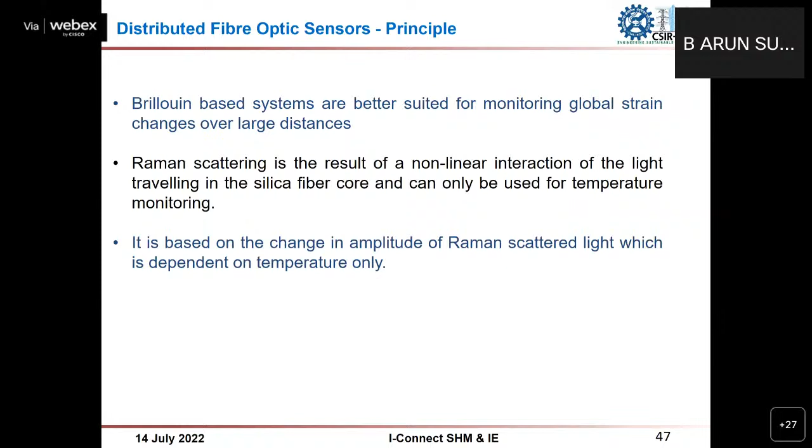So presently we have a commercial system and we have started working on development of this system. The Brillouin scattering will be dependent upon temperature and strain variation, whereas Raman will be used only for temperature variation. Also, presently these Raman scattering techniques are used for monitoring high temperature pipelines in some power plants. They have started using it.

Now we have started using this Brillouin-based technique for strain or temperature monitoring in bridges. So that is what we are presently working on.

Thank you. These are the studies we are carrying out by applying FBG for SHM techniques.